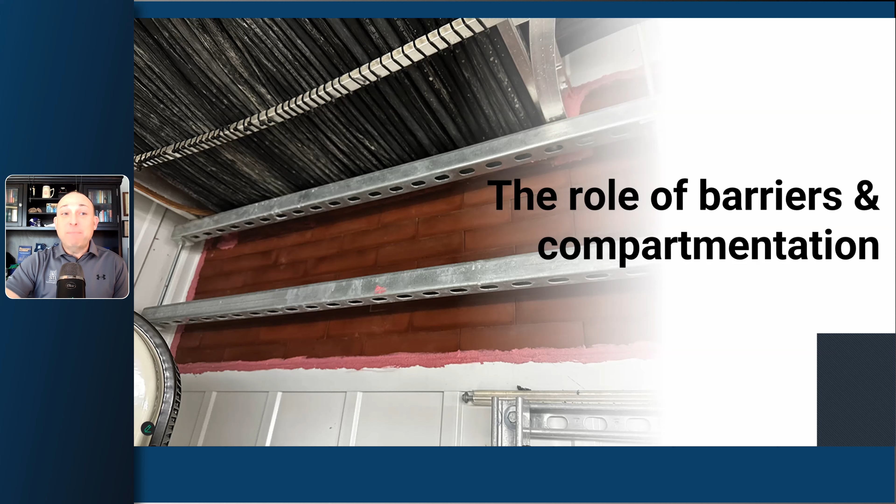So as I mentioned, we're going to start by talking about why fire stopping exists in the first place. The critical role that the barriers play in fire safety is compartmentation. This is stopping the fire and the products of combustion, and anything else that happens during a fire, to their point of origin so that people can get out in time safely. And it works in conjunction with other key fire protection principles that you see here on the screen.

It's what we call safety layering. At this point in time, we have a lot of technologies that exist to make cars safer—airbags, crumple zones, anti-lock brakes, power steering. You don't just make a car with one of these things, just like you don't just design a building with fire alarms and sprinklers. You also need some type of passive protection or containment.

So many people are familiar—you can see an alarm, you can see a sprinkler head, but a lot of people don't see fire stopping, that passive piece that's just in case the fire breaks out. This is where fire stopping lives. What we're trying to do is contain the fire and the other products of combustion to their point of origin, because at the end of the day, if you see any type of studies from NFPA, up to 75–80% of people die in a fire from smoke inhalation rather than the fire itself.

So what fire stopping is doing is what we see here on the screen. If a fire starts in an apartment there in the middle, we're using the fire rated assemblies and the smoke barriers and smoke partitions—a little bit more on that later. What we're doing is trying to limit the spread of fire to those other surrounding adjacent corridors, other apartments, whatever it is, floor to floor. So this is critical for fire stopping.

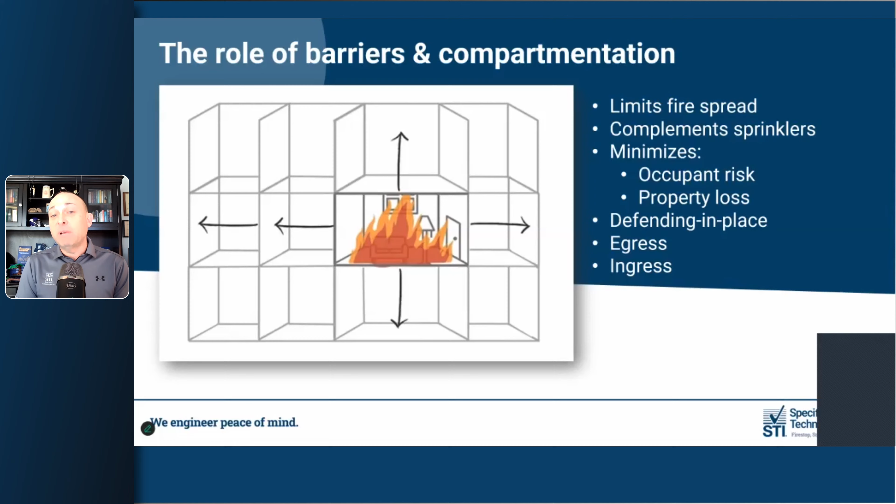It supports defending in place. So if you think about hospitals and other healthcare facilities, people can't physically get up and get out a lot of times in an emergency. So we want to make sure defend-in-place strategies are in place. And also egress, getting out if you can get out, and then ingress—we want our first responders to be as safely protected as possible. And that's what fire stopping is.

It's essentially sealing around any openings that are created by mechanical, electrical, plumbing trades—we'll throw the sprinkler contractors in there. Anybody making a hole in a barrier, we need to make sure that barrier is then protected. In terms of fire-rated joints, what we're doing is sealing together an opening that's left open intentionally for dynamic building movement, whether it be shear movement, wind sway, just different loads on floors, deflection of walls. We need to make sure those openings are protected as well.

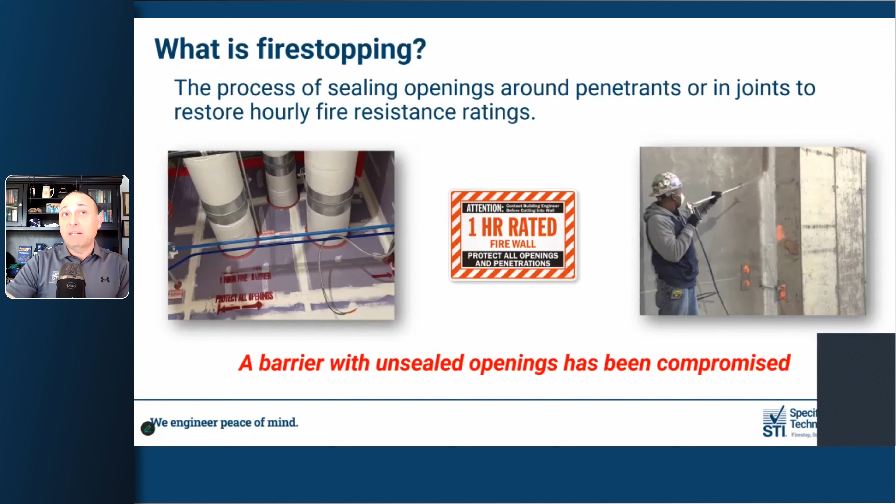So if you're a contractor, this is kind of what we teach: grab those life safety plans. If you're on the architectural side, engineering side, which most of you are, you're going to be very familiar with the building plans, the life safety drawings, and this is what we tell contractors to look for. If it's a renovation project and maybe these things don't exist and they're trying to fix a wall, we tell them to look for things within the assemblies themselves to say, hey, this is a fire-rated wall, like stenciling, which is part of the code.

So this was a 2-hour wall at some point before someone made Swiss cheese out of it. We look for things like fire doors, fire windows, dampers, old fire stopping, and any type of penetrating items. This would identify it as a rated wall.

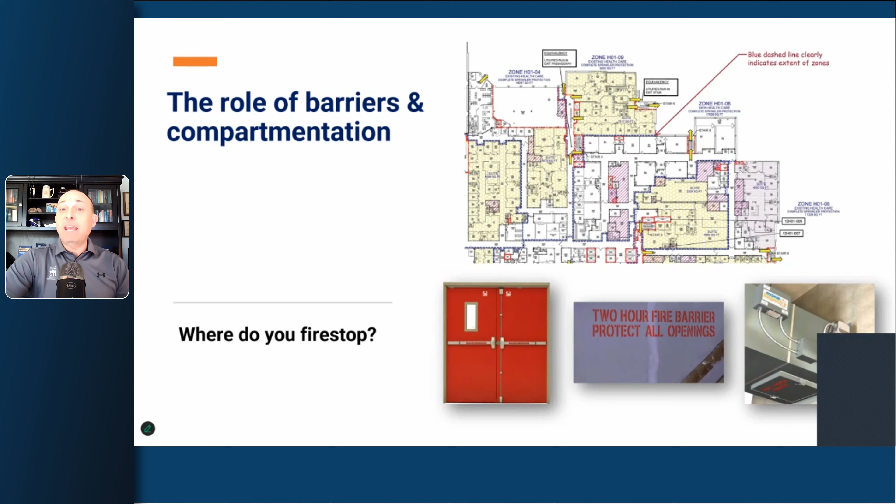But obviously, if you're on this side of it, the design side, you're going to be the ones coming up with these life safety drawings to tell the contractors what's a 1-hour wall, what's a smoke partition, what's a smoke barrier, what's a 2-hour floor. So this is kind of what we're talking about, and these are the barriers that we're using to contain the fire and those products of combustion.

So now let's talk about how they get compromised, because they do way more than people think. If you walk through any building that's been open for any amount of time, what you see is kind of what you see right here.

It could be anything: ducts, cables, pipes, you name it. Basically, anybody that's poking a hole in a wall or floor, they probably will. And even after the building opens, there's going to be small renovations. There's going to be the need for cables. We'll talk a lot more about cables in a bit.

But these are some pictures from actually new construction, believe it or not. So they're doing scab patches around ductwork there. They're using things like expandable foam, polyurethane foam that's actually very flammable.

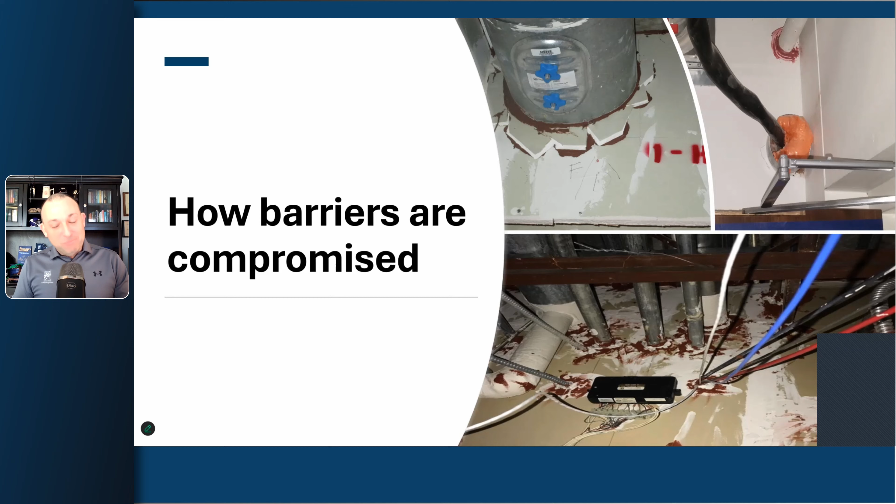Let's be crystal clear. We would never condone anything like what you see on the screen here, but we see it all the time. So we figure we'll show you what not to do. So don't let this be you.

All right, so let's talk about the MEP folks. Again, your mechanicals, your electrical, your plumbing contractors. Fire stopping is a little bit different than the trades that I just mentioned or that you see there on the screen. It's basically going to be a caulk gun that's handed to the low person on the totem pole.

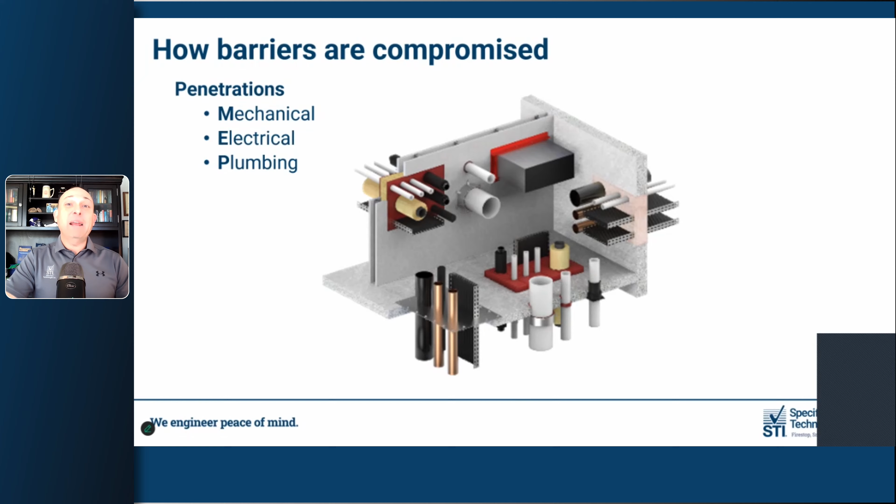So you think you went to trade school to be an electrician? No, today, son, you're going to be a fire stopper. You're going to be a caulker. So these are the same folks that are making the holes in the walls that if they're not educated properly, they don't know how to restore the hourly rating that they lost because they poked a hole in it.

So we'll talk a little bit about UL and how they define what a penetration fire stopping system is. It's very simple. If you have a wall or your floor, it's got to be rated. You have a penetrating item, so it could be a duct, it could be a pipe, cables, whatever it is. It could just be an open hole. And then you need some materials that are designed to prevent the passage of fire through that opening. It can't just be expandable polyurethane foam or newspaper or just something that is flammable.

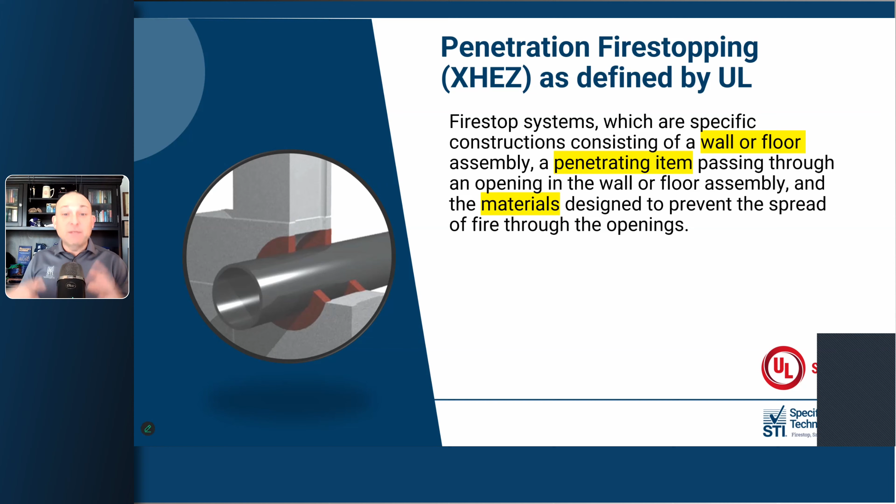You need, you see here, a concrete wall that was probably rated, tested for a certain hourly rating. Then you have an opening, a round opening, a pipe coming through there, and some intumescent or maybe some expandable type sealant that's going to close that down.

When we're talking about joints, they're kind of compromised a few different ways, right? As I mentioned, you leave these openings open intentionally so that the load of the floor doesn't crack your drywall, so that your two masonry walls don't spall. You're going to put some movement in there because you know that things are going to move over time. These buildings breathe. They have different wind sway, and in certain areas they have seismic conditions.

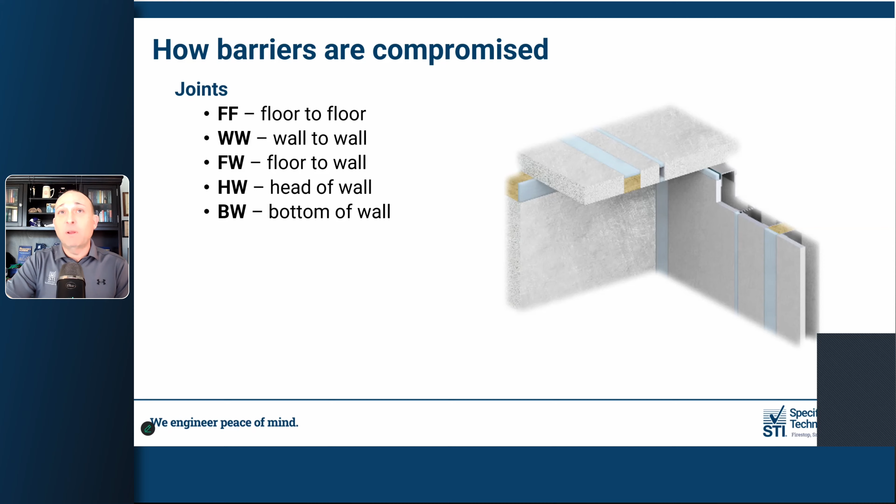So just kind of taking a look at the definition and how UL talks about what a joint is. It's going to be adjacent assemblies, right? Head of wall or 2 walls coming together. They both have to be rated. No matter how great the fire stopping product is, you're not going to get a rating to a wall that never had one to begin with. So we need to make sure we have 2 adjacent or rated assemblies, and then the material that you're going to put in that linear opening to stop the passage of fire and smoke through there.

So we see pretty typical head of wall joints there with your concrete over steel fluted decking, if you will, and a gypsum wall meeting it, and they stuff it with mineral wool and then they spray it. That's kind of what we're talking about for your interior finish joints.

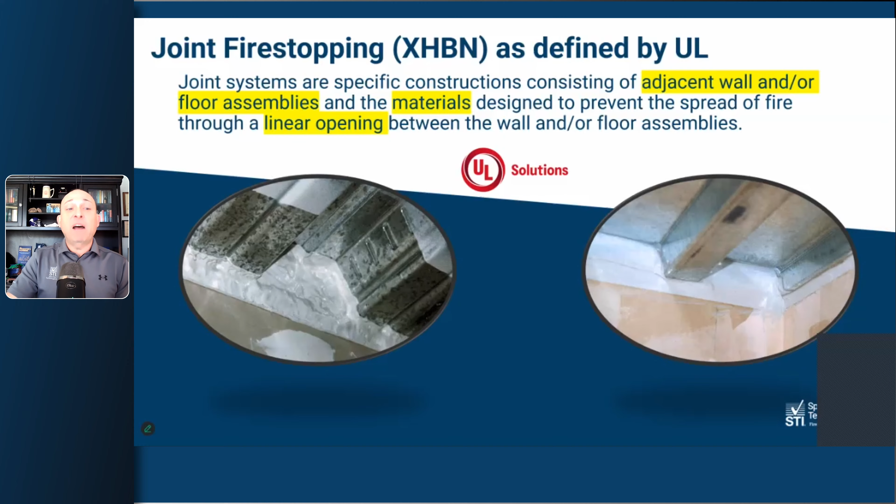And then one final area where you're going to see compromised area where you need to protect it, where you have some openings, is around your perimeter. So the code tells you that you need to extend the rating of the floor to a non-rated curtain wall panel. Most of the time it's non-rated. I realize in some cities you do have to have rated exterior walls, but for the most part you're designing these beautiful floor to ceiling glass curtain wall assemblies, and we need to make sure we put some type of system in place to protect that edge of slab gap.

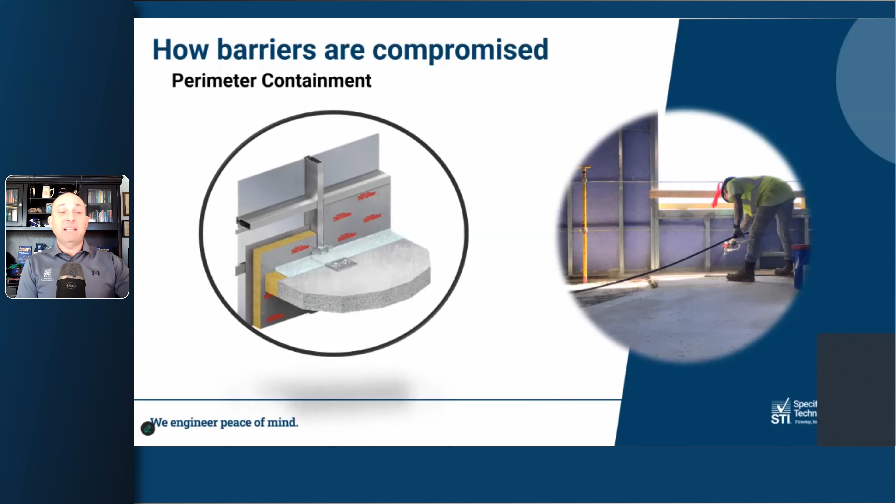So what we're doing is taking the rating of the floor and extending it to whether it's a steel back pan, or you're just insulating the panel on site, or EIFS, or a poured in place panel. We just need to make sure we're extending the rating of the floor and filling that gap so that the fire doesn't propagate on the interior of the building.

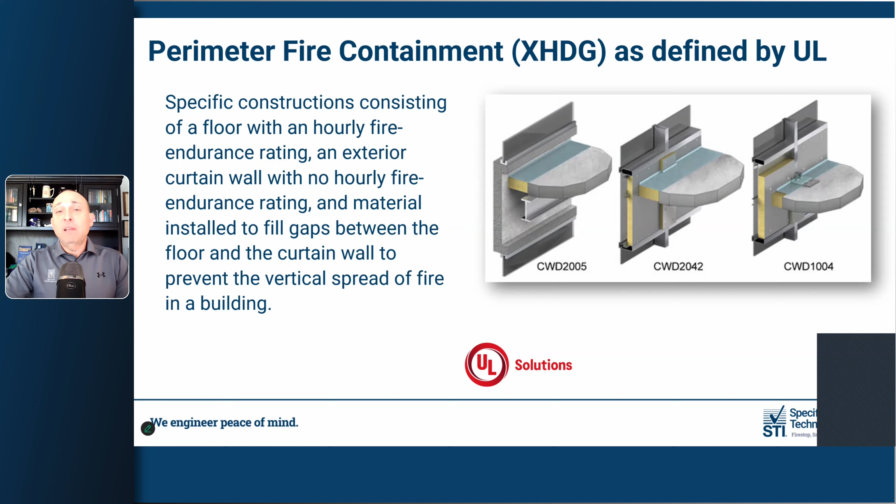So those are essentially the 3 categories of fire containment systems, if you will. And we'll talk about now what the codes say as far as why you have to fire stop them. Again, it's life safety, but I can tell you that no contractor fire stops for the fun of it. They do it because they have to.

I heard one time, and this is a sad thing, but I say it all the time, building to code is the cheapest way to build something legally. And if you let that sink in, what we're doing here is honestly we're checking boxes and trying to make the buildings as safe as possible. So at the very least, we want to make sure we're hitting the code requirements.

So when you're building to code, a lot of times you're talking about the IBC. Now we have the 2024 edition out. Most jurisdictions obviously haven't adopted the 24 edition, but every 3 years it's updated, so a lot of jurisdictions now are adopting the 2021 code. Obviously there are places, certain regional or local codes where you'll have your own code, typically based on the IBC, and then you'll have different operating codes, right.

So you'll have the life safety code, which is the 2012 edition. And the reason I'm showing this is because this is what CMS and the Joint Commission and different accrediting agencies, for your healthcare and hospitals, they're judging the different type of life safety systems to the life safety code. So you have a building code, you have an operational code.

So a lot of times what we say to architects is, hey, design with this in mind. For right now, what they're going to be inspecting to is going to be the NFPA 101, even though your 2021 building code says this. So they're always going to default to the one that's most restrictive. Don't find out afterward which one that is.

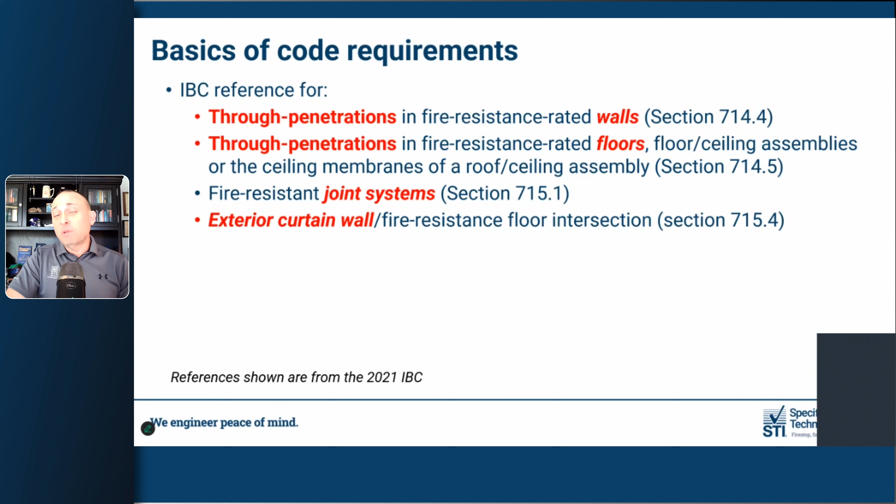I did mention a little bit earlier, we talked about smoke barriers and smoke partitions, using those to help contain the fire. A lot of times people will just say, hey, what do we do with the smoke walls? And smoke walls, as you see, the code doesn't define what a smoke wall is. So you're going to be dealing with smoke barriers and smoke partitions. This is essential for contractors to understand that your smoke barriers actually need to carry a 1 hour fire rating. So when you're specifying or designing your building with smoke barriers in mind, just know you're essentially designing a barrier that contains a 1 hour fire rating, and it also stops the passage of smoke.

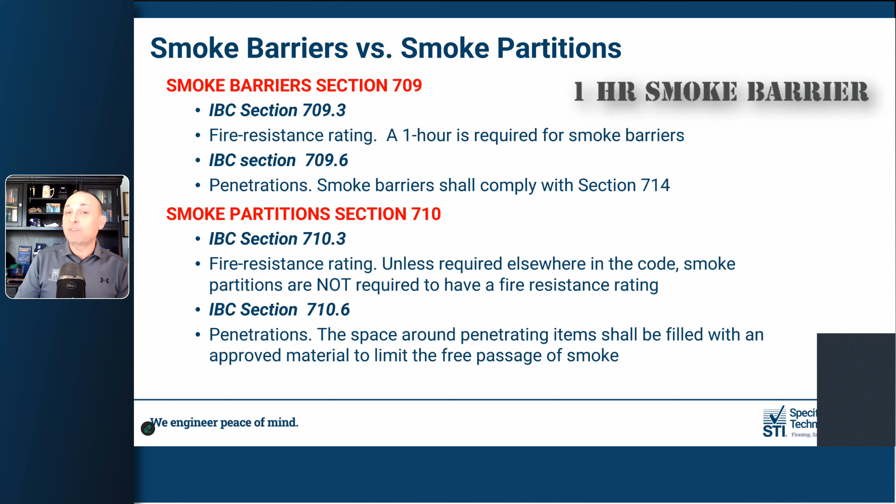So it needs to have an L rating, whereas your smoke partitions, non-rated, does not have to, but it does need to pass the local authority having jurisdiction, so you can't just put bubble gum in there. You need maybe an approved smoke and acoustical sealant. So there's the differentiation between your smoke barriers and your smoke partitions. Don't call them smoke walls, because they don't exist.

Since we're talking about codes, we're going to talk about where we do testing. We are a Firestop manufacturer, so there are others out there as well, and the code doesn't say where we have to do the testing, just that we have to test it to certain test standards, ASTM and UL standards that we'll show you next. These are three of the biggest testing agencies in North America.

A lot of times people just default and call them UL systems. I would say maybe 95% of through penetration testing does happen there, but there are a lot of curtain wall or perimeter fire containment systems that are tested at Intertek. FM Approvals, part of FM Global, has their own testing lab as well, so there's a whole nother batch of tests over there.

Again, the codes don't say where the testing has to be done, just that it has to be done to these standards that you see on the screen here. So you don't have to memorize them, but I would recommend putting especially these test standards into your spec. This way the contractors know that there are different products for through penetrations and we test them differently.

ASTM, if you think about it, will give you your F and your T rating—a little bit more on that later. UL will then take that F and T and build on it, letting us test for smoke leakage and water washout. Your joint systems are tested to different standards, because there's going to be movement like we talked about, and quite frankly there's not an opening with a penetrating item, it's a joint system. So we have different test standards for the different types of fire stopping systems that you will encounter and that you have to design to.

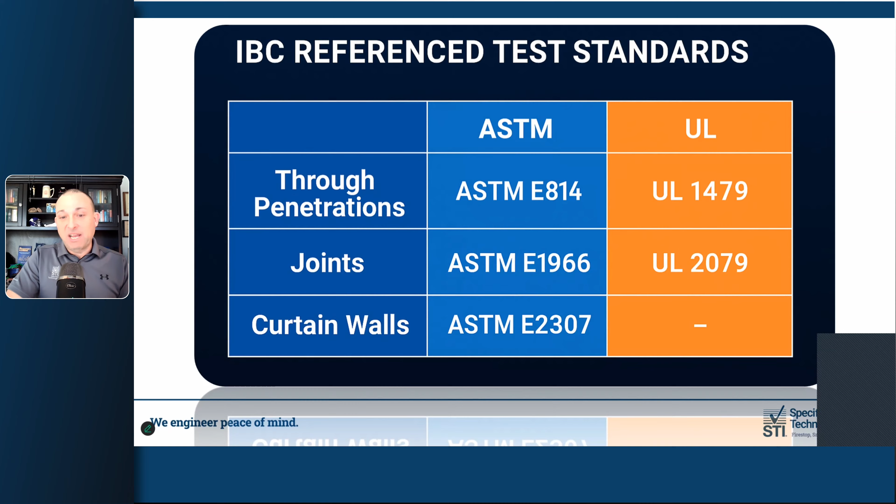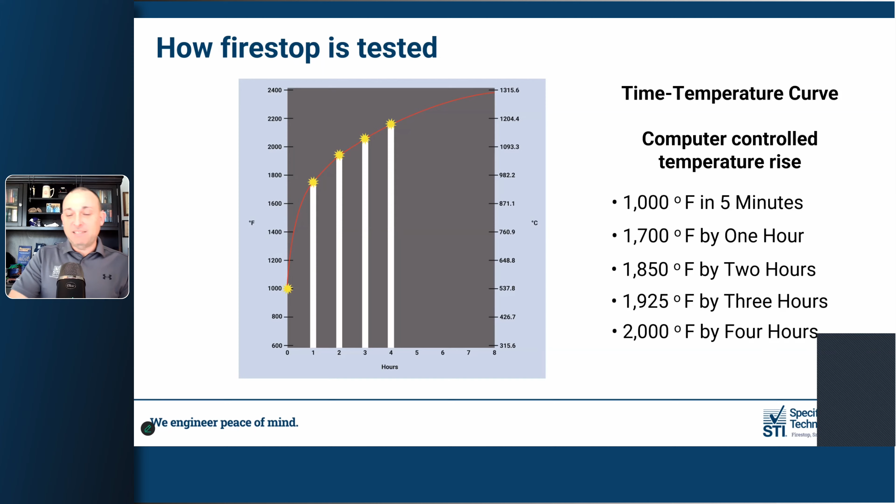When we do that, the first thing we're going for is an F rating. This is what most people identify fire stopping with—your flame pass through, from that hot side underneath to the cold or unexposed side above, well, how long did it last? Most of the fire ratings you'll see are 1, 2, 3, or 4 hours. There are some 30-minute ratings that have been specified or called out there, but as manufacturers we're typically trying to go for at least an hour, if not longer. So F rating will be the first thing that you see on there.

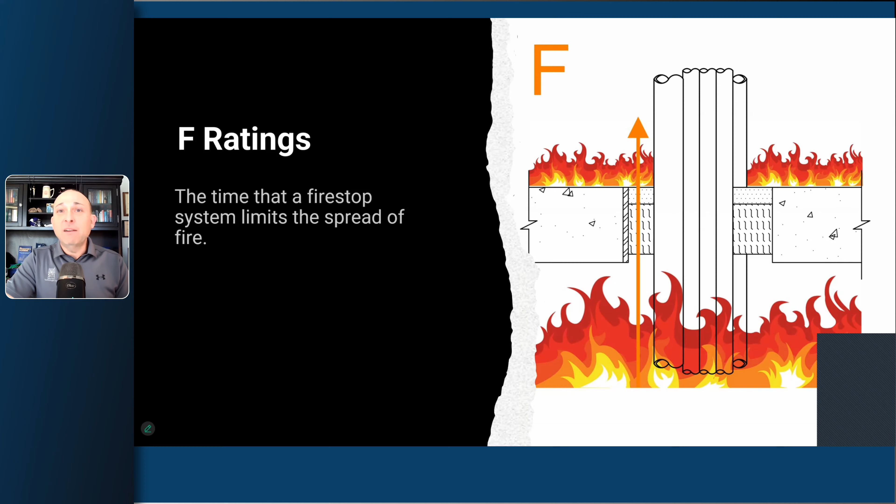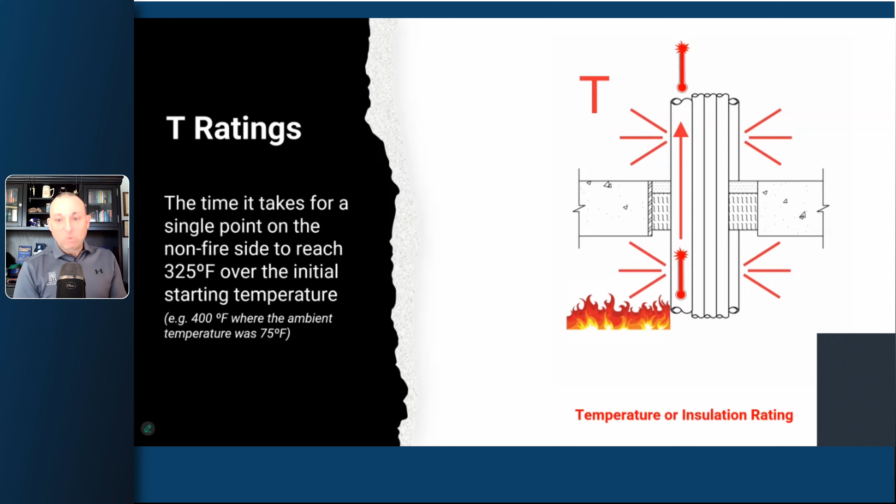The next thing that you'll see on a system card is going to be a T rating. This is another rating required by the code, and it protects the thermal rise of that seal or that space around the seal as the fire hits it, on your unexposed side. So even if that fire stop system is in place, if you have a cable bundle or a bunch of copper pipes next to each other that are going to get really hot really fast, you're going to have 325 degrees above your starting temperature really quick. So your F needs to match your T, unless it meets certain exceptions. So what are those exceptions? That's a great question. So here they are.

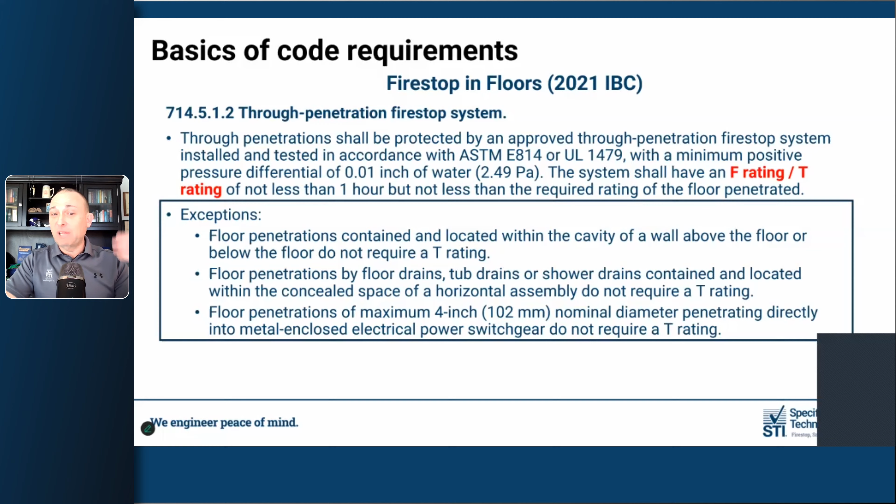So the code says that you have to protect the thermal rise through that fire stopping system to the unexposed side, unless it meets one of these exceptions. So a lot of words on this slide. I don't like words on slides, so I'll show you pictures instead. Words scare me, but this is essentially what that code section says.

If your penetrating items wind up within the stud cavity of a wall, which they usually do, then you don't have to subject them to a T rating, which would entail wrapping them 36 inches with some high temperature wrap. So as long as they're in the stud cavity of the wall, you're good.

Floor drains that are going into floor ceiling assemblies, think about wood framing structures. So if that goes into there, you don't need to have a T rating.

And then if you have up to 4-inch conduit going straight into a metallic switchgear, you don't have to protect the thermal rise there as well. That's going to all find its way into that box there.

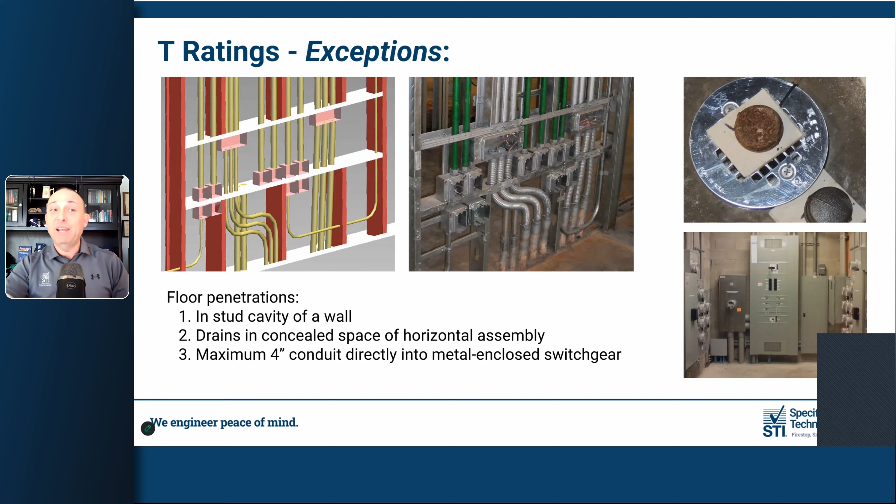Again, these are exceptions to the code. So if you wanted to make sure that you were meeting those exceptions, have a pre-construction meeting with the architect yourself, with the general contractor, with the installing contractor, just to make sure everyone's on the same page and they understand that this is an exception, right? So it's not the rule, because the rule is the code, which says you have to protect it.

Some optional ratings that we get as manufacturers, as I mentioned, we're going to check the smoke leakage in certain scenarios. So if we have nested cabling, cable bundles, or again, head of wall joints, depending on for your smoke partitions or your smoke barriers, where you need that L rating also. We're testing at UL or according to a UL standard to get this L rating.

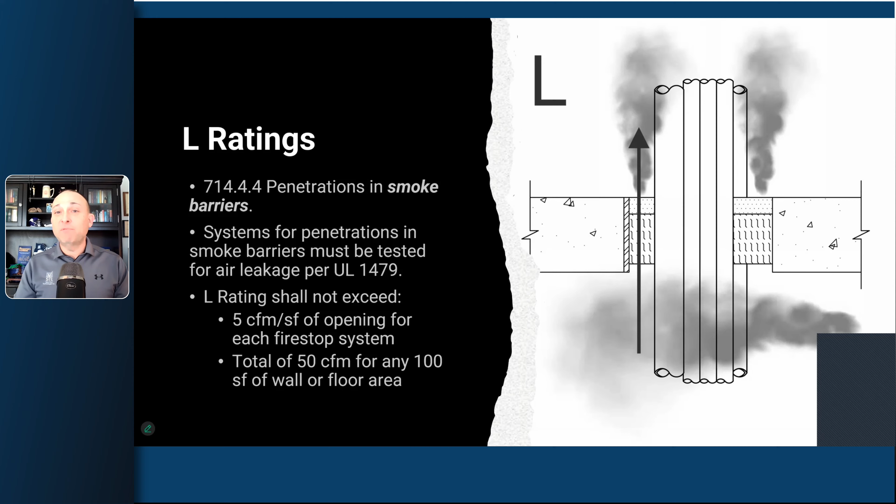So the code recognizes that we are not going to always have a hermetic seal. So you could see 5 CFMs per opening or up to 50 CFMs per wall of 100 square foot is allowed. Again, we're not always going to get a hermetic seal, but it is some allowable air leakage through that seal.

And then W ratings, sometimes it's important where you have plumbing stacks where you may have some condensation issues or pipe bursts. Once you're in full operation, you may want a W rating or a watertight seal on there. This is also good for floor seals as the building itself is going up.

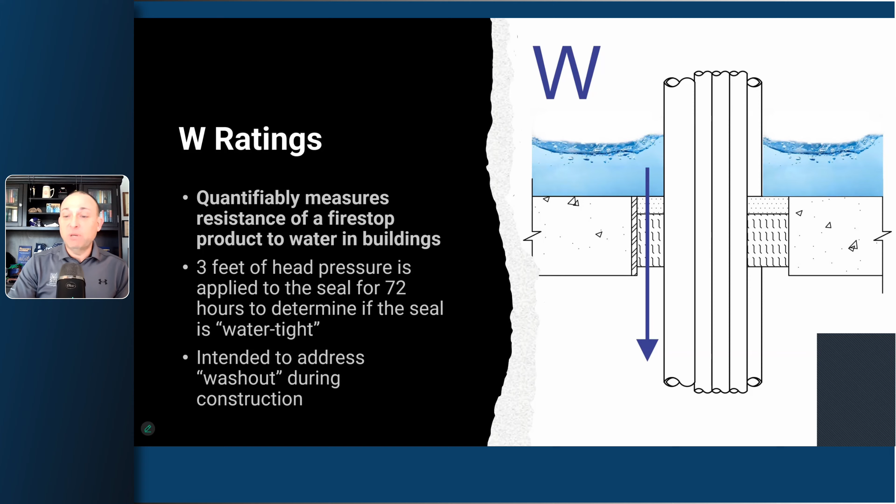If they're using a silicone type product, you can get a W rating where we put a cylinder on top of that seal and put 3 feet of head pressure on there for 72 hours before we burn it then. So this is going to basically expose that sealant, that fire stopping system to water for a certain amount of time, simulating it sitting on it, and then the building catching fire at some point in the future. So those are some optional ratings that you can put into your specification for certain instances.

This means not just your local authority having jurisdiction, not just the local code official. They have a lot of other things to look at. So if your building is over 75 feet high, or it's a structure that's of national importance, air traffic control towers or hospitals or key facilities where if you had an emergency, you could have some real devastation.

So certain types of buildings, including now wood frame structures or group R occupancies over 250, need to have a person that's dedicated, or a company that's dedicated, to reviewing fire stopping systems all day long, that's hired by the owner to do that, and then provide a report to the local code official, who then obviously can go and inspect or spot inspect things like that.

Special inspection for fire stopping - this is something that more and more jurisdictions are starting to enforce. But if you put it in your spec, they'll know that it's actually a code requirement and it won't be overlooked as much as it is right now. That's me on my soapbox.

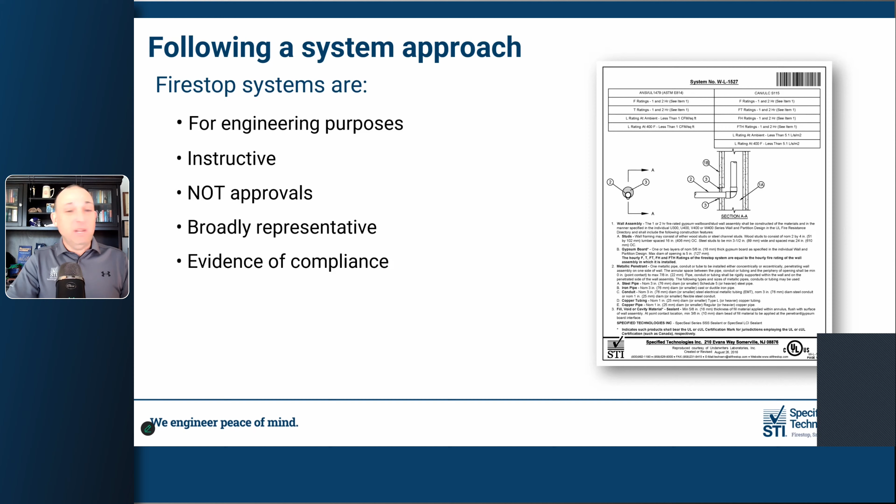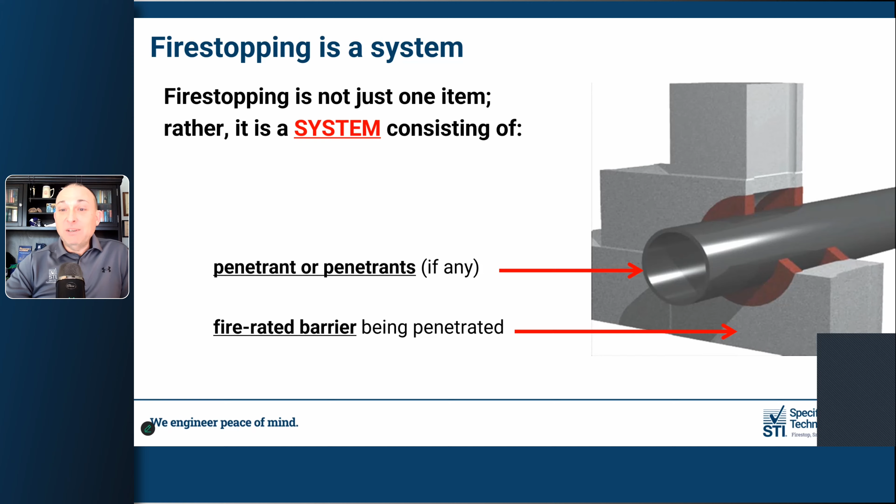WL 1527, as part of their submittal package, shows that this pipe can go in the wall on one side and then you're sealing it only. Evidence of compliance is that it's been tested to those standards we showed you before. So this is what a system looks like, a simple one pager where you can get away with caulk only, because maybe you have a metal pipe coming through a block wall. The block wall is not going anywhere for 1, 2, 3, 4 hours, but we need to make sure that if that pipe comes through there, we seal this opening with sealant designed to protect that penetrant.

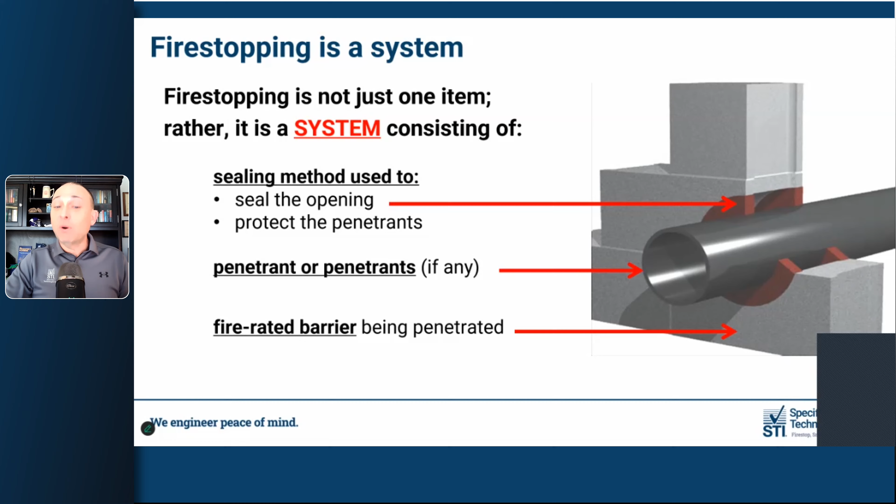And if it's plastic, then you need something that is intumescent, that's going to expand with heat because that pipe is going to burn away. So you need to make sure it gets very aggressive.

When you're talking about systems, up top it's always going to call out what the system number is, all of your ratings. This one has F ratings, this one also has some T ratings. Your penetrating items will be right here in the middle. Most of the time, if it's a metallic pipe, you'll have steel pipe, iron pipe, copper - so it could be the same system for 5 or 6 different trades, like plumbers and sprinklers and electricians using conduit. This could be the same exact system for all of them.

Your annular space is going to be the opening, so it can't just be whatever size they want - it's going to tell you it needs to be a certain size. And then finally, the fire stopping material down there.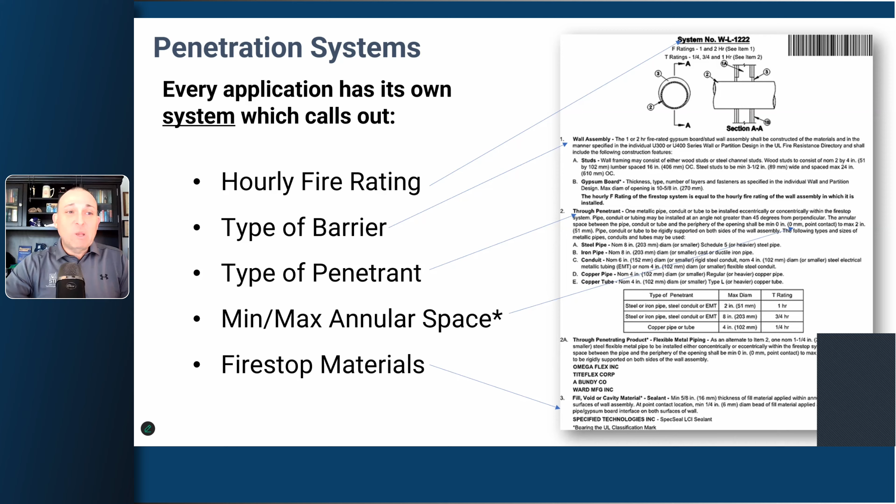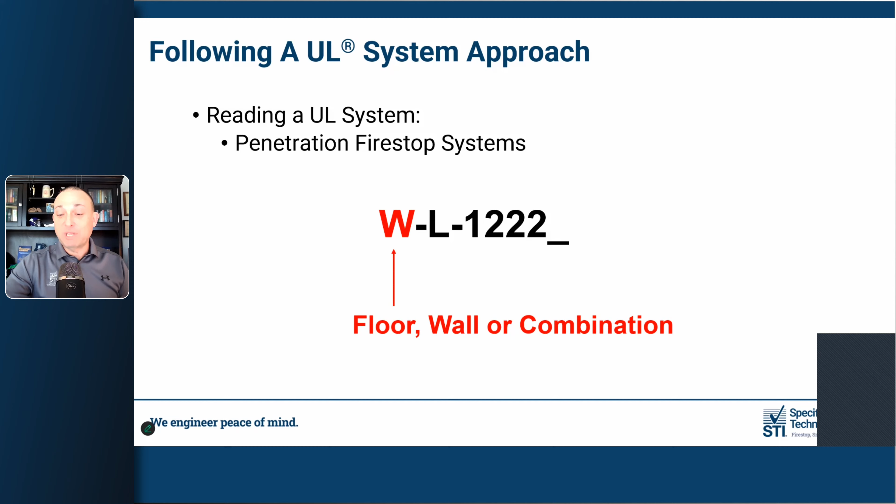So if you're reviewing a submittal package and seeing some UL systems, you can easily identify that W tells you this is a wall system. They're not trying to trip anybody up, the nomenclature is pretty easy. So it's going to be a floor, a wall, or a combination - wall, floor, or floor and wall together.

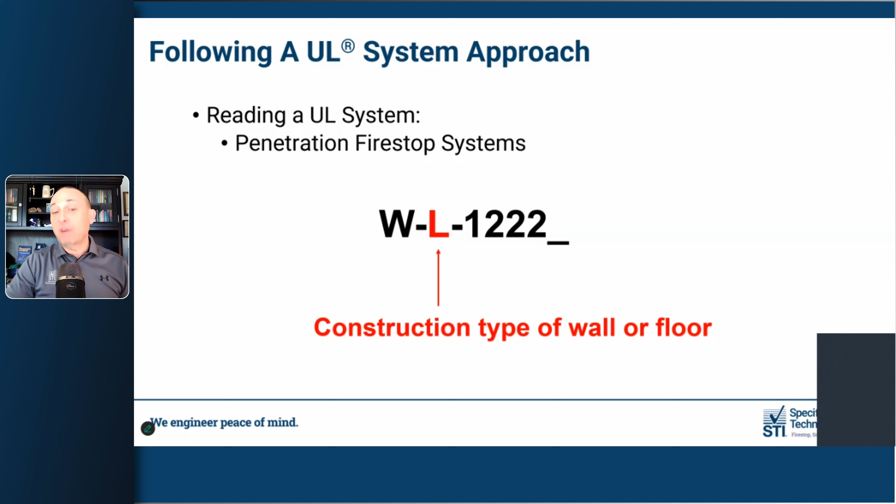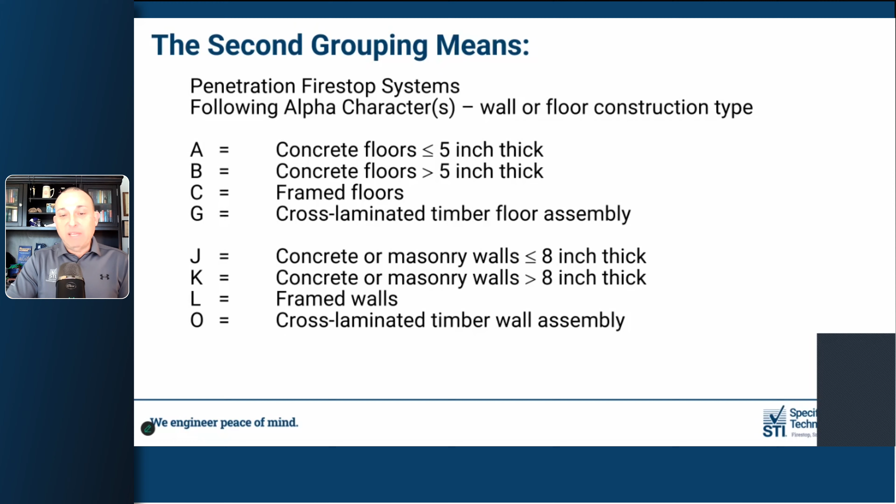The second letter will tell you what type of wall that is. In this case, your L is going to be a framed wall, so it could be framed with either wood or steel studs. Whatever manufacturer, whatever they're using is going to stay in the system, whether we used steel or wood studs. Sometimes it's both, sometimes it's either or, sometimes it's only one, depending on the product. So you could have a concrete or masonry wall. Those combination systems, as I mentioned, you'll typically see CAJ, but that's what that second letter or grouping of letters tells you.

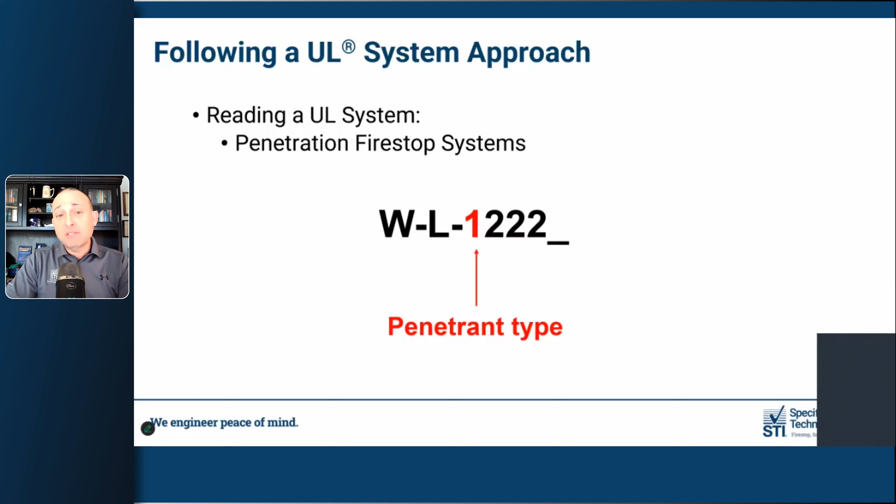The first number you come to in a UL system will tell you what the penetrating item is. Your 1000 series are going to be all your metals - iron, steel, conduit, copper. 2000s plastic, 3000s cables, and so on. So when we're teaching contractors how to install this, the first thing you need to do is ask, what's a system? A lot of times they don't know what a system is, but they all mean something - all the numbers, all the letters mean something, and even the last few numbers mean something.

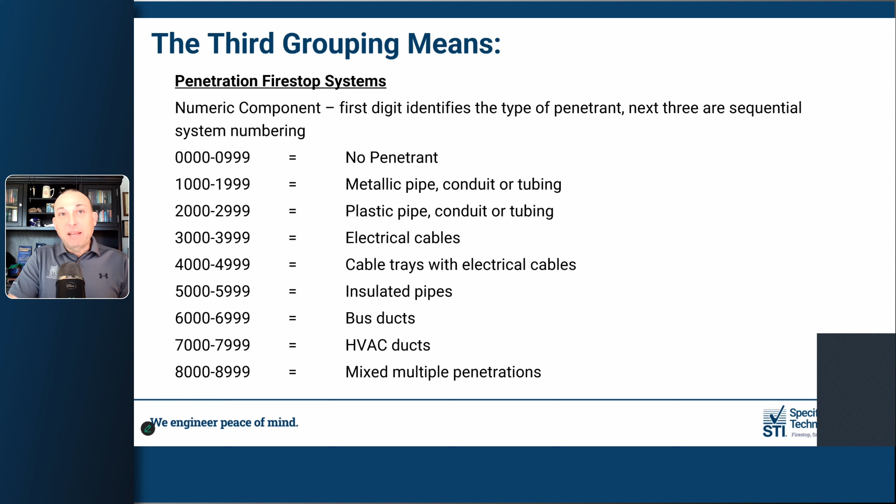It means who authored or who sponsored that test.

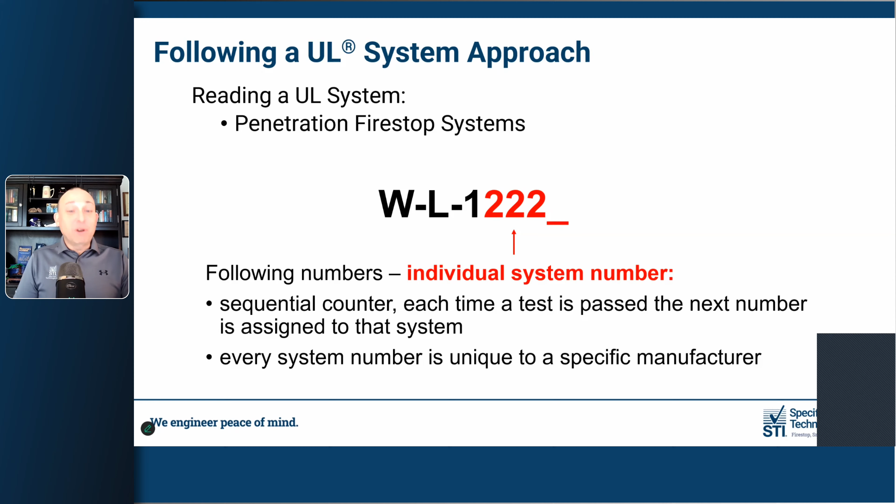WL1222 is the 222nd listing in penetration fire stop systems through framed gypsum walls, and STI is the owner of that system. And then you'll even see the little dash there at the bottom.

A few years ago, UL actually started running out of system numbers, and they didn't want to take away the nomenclature up to that point. So what they're going to do is just add a digit at the end of it. So if you see 5 digits at the end, like WL10000, it's not a typo. It's just probably one of the newest systems.

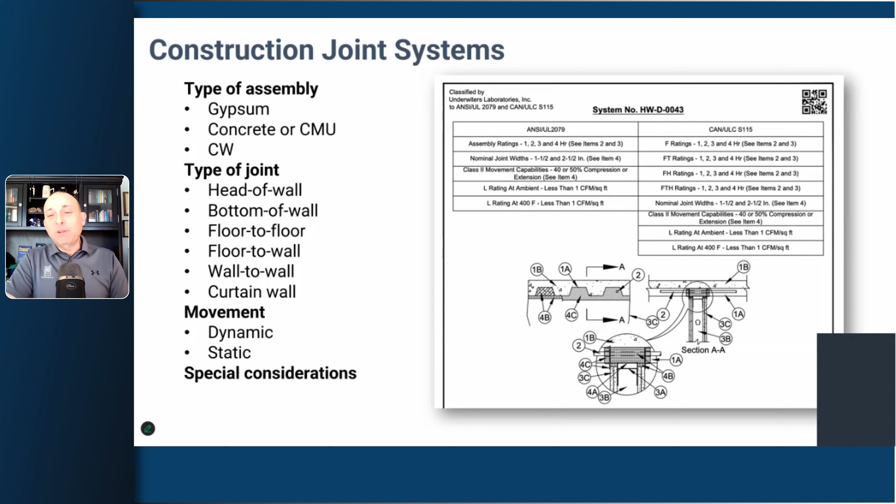On the right-hand side, for our Canadian folks, you can see that we have different standards that we're testing for Canadians as well. So you'll see that they break that out a little bit different with the F and the FT. And if you know, you know, and if you don't, feel free to reach out and we'll put you in touch with our Canadian crew to help you decipher some of these. But there are some different standards north of the border there.

All right, so when we're talking about how to read the numbering system here, your first 2 letters will tell you what type of joint system that you're dealing with. So you can see the perimeter fire containment or your curtain wall. That's lumped into how to read the same system, even though it's a different test standard. So you'll see head of wall, HW, bottom of wall, BW. Again, not trying to trip anybody up. They want to make sure that we're getting this right.

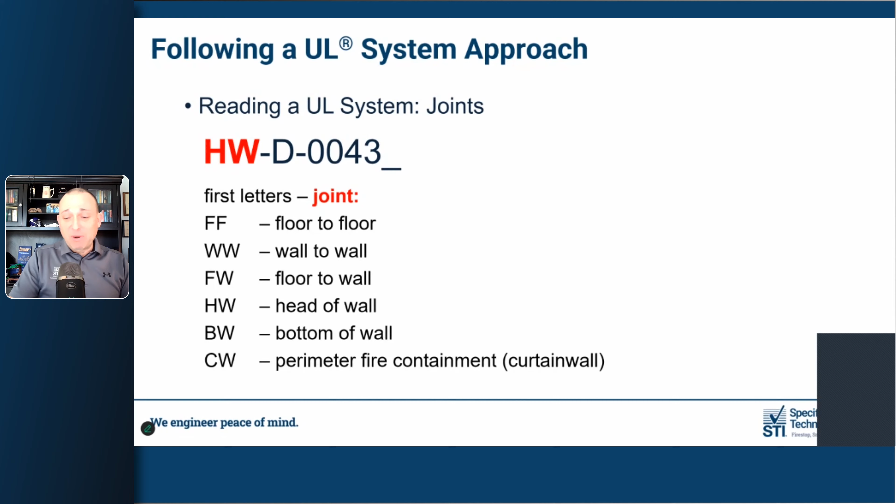The second letter or the second group there will tell you if that joint system moves or not. So if you see the D, that means it's a dynamic system. It was tested with that movement, and we, as the test sponsor, will put in what dynamic movement was achieved there. So sometimes it's a class 1, sometimes it's class 2, and this all depends on how much we're moving, how fast we're moving it. So be cognizant of that.

And then there are some static systems as well, whether you're not getting compression and extension because maybe the joint is in the plane of the wall, or maybe a contractor used a product that doesn't move, that was not designed for it. We do test some things sometimes that we know are not going to move because sometimes they don't have to, and sometimes we know that things happen anyway. So at the very least, we want to make sure that we can get you the F rating that you need for that fire protection.

And then the numbers here mean a little bit different in your joint systems. The first number will tell you the width, or how wide it can be. So you can see the 0 series can go up to 2 inches, but the systems will oftentimes be very specific, always be very specific, about what was tested. So if it was a 1-inch joint, it would still fall into the 0 series, but you couldn't exceed 1 inch with that particular system. And then as the joint gets bigger, you can see that that first number there will get bigger.

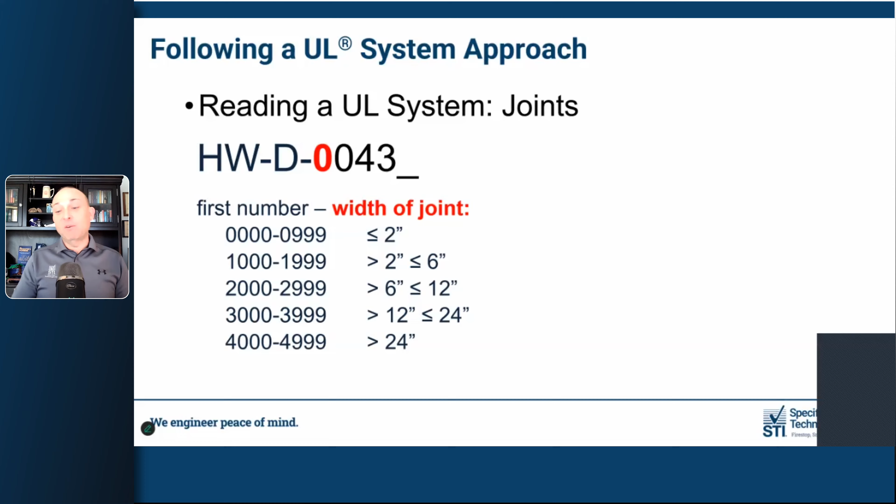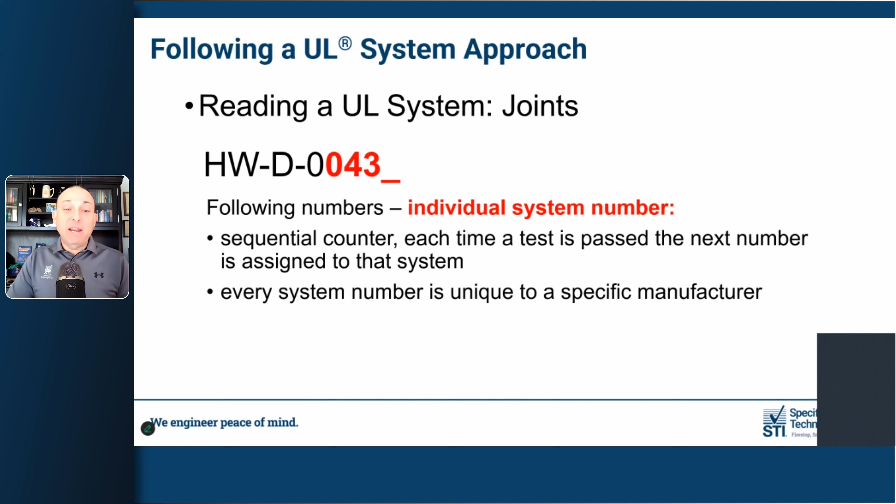And then the same way that the penetration systems work, the last 3 and/or 4 numbers go to the individual test manufacturer there. Same deal with your joint systems.

All right, so let's talk a little bit about some fire stopping products.

Again, we know that this is just one portion of the system. The products themselves, oftentimes contractors will think, give me the 2-hour fire caulk or the 4-hour fire caulk. Sometimes they go to the local hardware store and buy the 2-hour because it says 2-hour on there. But the products themselves do not have a rating. They're just one portion of the fire stopping system.

But when you are specifying this, it's good to know how they break out and what the applications are. So you don't just say put in a tested fire stopping system. You may want to say, put in an intumescent fire stopping system that's designed for movement. You can get a little more specific and lean on your fire stopping manufacturers to help pull together some of that language, if you're not using one of those services that stay up to date on all the codes, standards, and test methods.

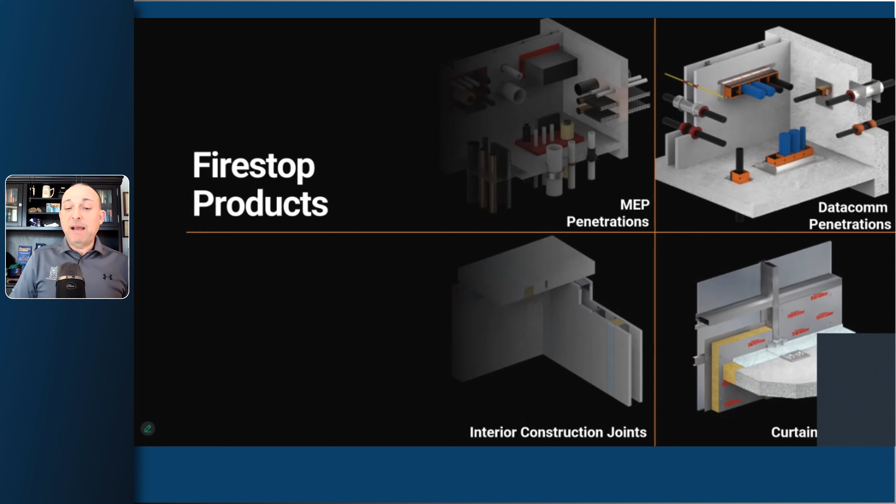So again, here are the different product categories. We're going to talk a little about MEP penetration products. We'll break out data communication penetrations because they're just different animals. The cables are in sleeves, so they're outside of MEP penetrations. Unless you have some major renovation, you're not moving ductwork or pipe, but cables move all the time. Our joint systems, as we talked about, both interior construction joints and curtain wall joints, we'll talk a little about what types of products are out there and what they do, and some of the benefits of each.

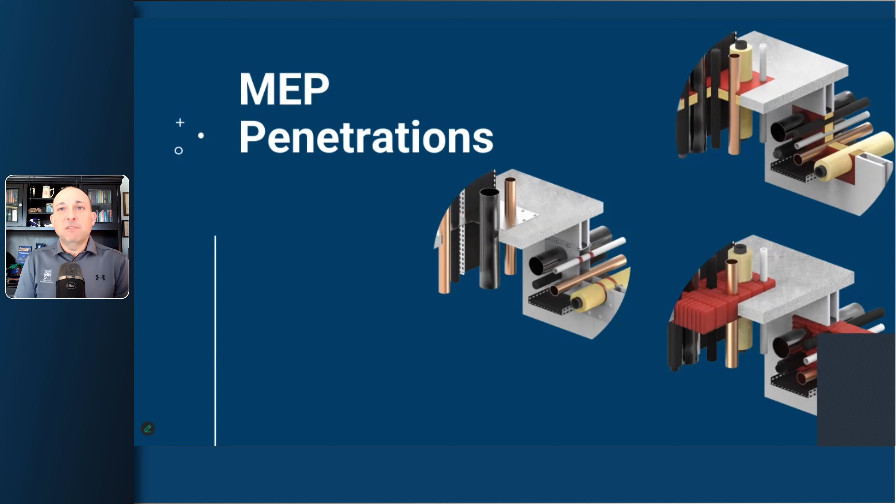So we'll start with MEP penetrations. Everyone knows the intumescent sealant. Some people like to do finger painting all over the wall, but what we're trying to do is get that sealant in the annulus, flush with the surface. You can see a typical plumbing contractor here getting the sealant in there and using a tool to get that flush with the surface.

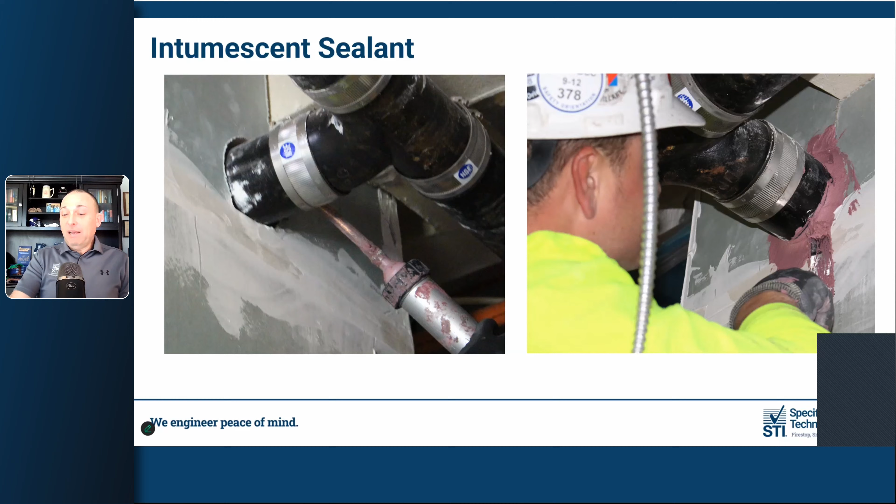Intumescent sealant is a flexible, fire-resistant material. It reacts by expanding with heat, or intumescing, and forms a thick char. It's great for metal pipes - easy, since metal pipes aren't going anywhere - and it's also good for certain smaller size plastic pipes. But when you get a little bigger with plastic pipes, the sealant alone isn't able to crush that PVC pipe.

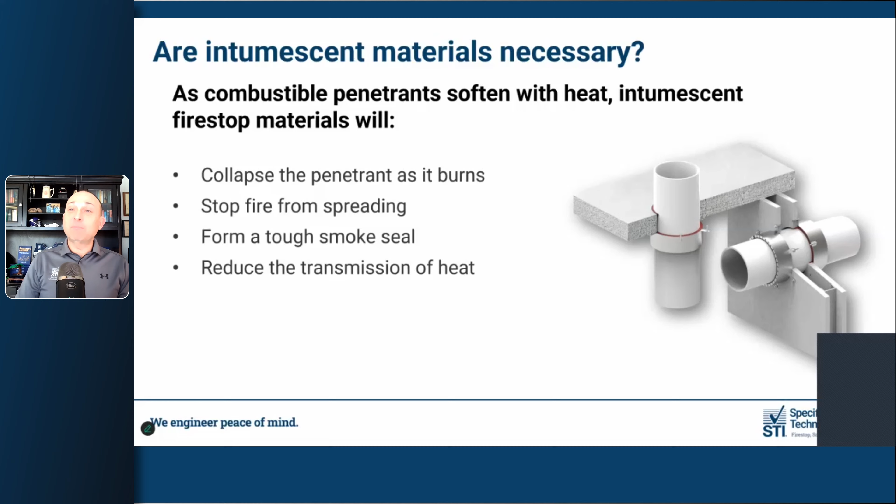In certain jurisdictions, PVC is perfectly acceptable - it's easy to use, easy to put together, lighter weight - but from a fire stopping standpoint, it's going to burn away. A PVC pipe is going to be gone in 7 to 10 minutes. So if you have a 4-inch PVC pipe, you're going to have a 4-inch hole in about 7 to 10 minutes, unless you put in a fire stopping system that doesn't just have sealant around it, but has a collar specifically designed to crush that pipe.

You can see what it does here on the left, the hot side, the hard ash char on the right side. What it does is crush that pipe - it seals, it intumesces really fast, really rapidly. This is why you have to have certain fasteners on the wall, to make sure it doesn't blow off. But on the cold side, that PVC pipe continued. So from a T rating standpoint, this is also a great building product to work with. You just need to make sure you have the right type of fire stopping systems when you have pipes that will burn away in 7 to 10 minutes.

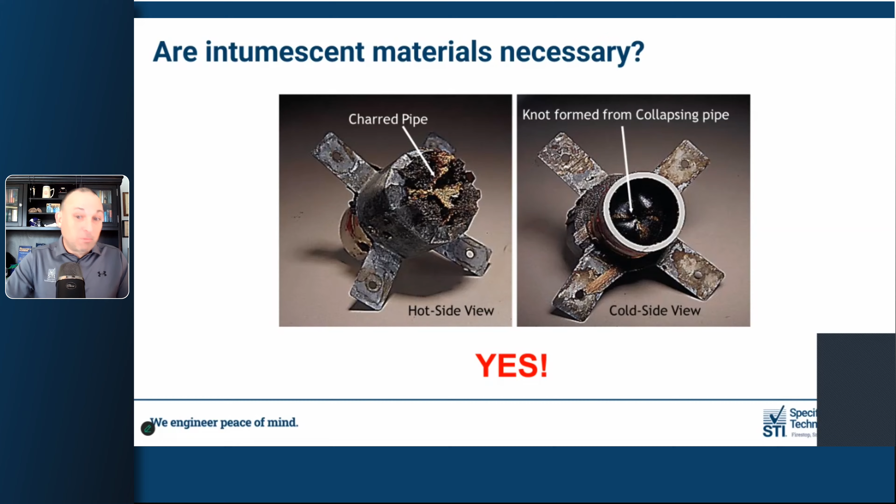So for data communication, we'll talk a little about the types of products here. These are penetrations where you're going to have frequent moves, adds, or changes - think upgrades in Wi-Fi, or a new office that needs Wi-Fi, or expanding network coverage, with cables being added, moved, and rerouted. The frequency of change can vary significantly depending on the building's occupants. You can have new occupants and suddenly have to redo everything - it's always evolving, always upgrading cables - so you need fire stopping systems or products that allow for these high traffic openings to meet the flexibility they need.

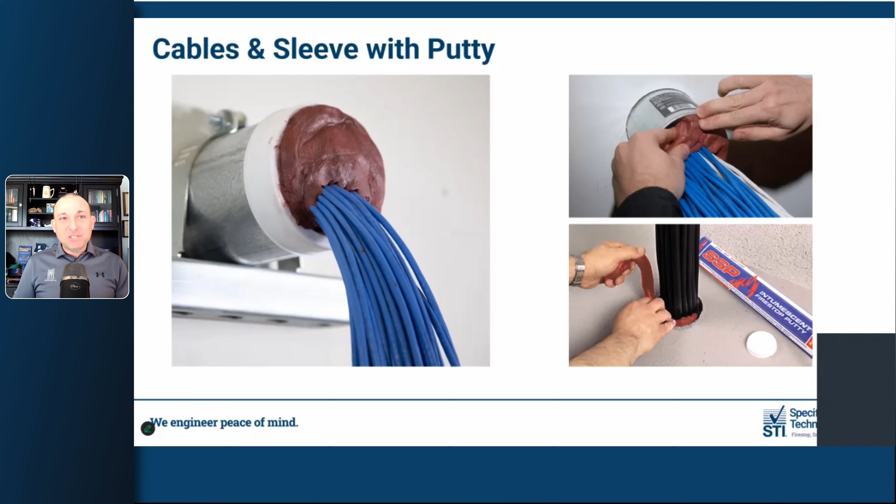So historically, putties have been the go-to solution for data cables. Perfectly acceptable - they're soft, they're conformable, they don't harden, well, most manufacturers don't harden over time. They're manually packed into the openings, so they're specifically useful for small to medium cable bundles where you're going to need to get back through there at some point in time. But once you start getting a little bit more, too much, then you're going to turn that sleeve into something that's overfilled.

When you have data cables, you have something that's flammable - you have plastic jacketing around there. So these sleeves are going to have some type of cross-sectional fill maximum of around 48%. I don't know if you've ever been on a job site and seen a sleeve with more than 48% fill, but I can tell you it happens all the time. If you have a 4-inch sleeve, for instance, you really can't have more than a 2-inch bundle of cable going through there.

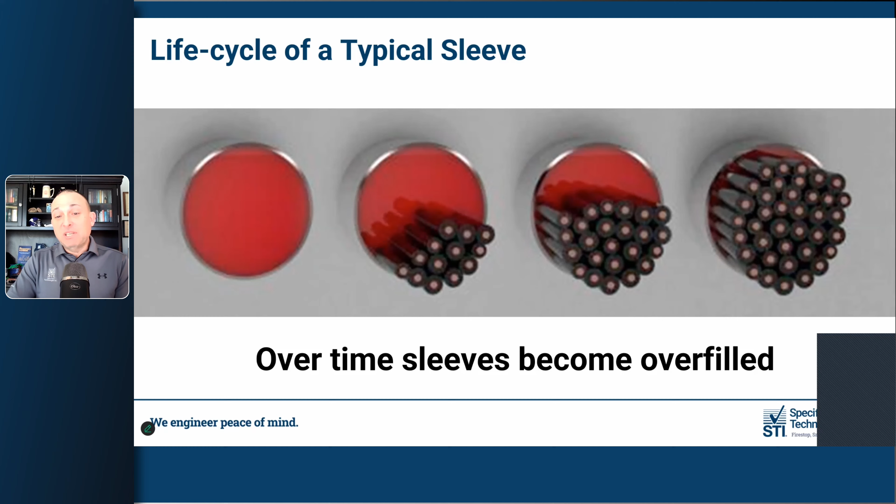Because, again, over time, it's tempting to just run something else through there, or if you are upgrading, next thing you know you have something that looks like the far right, where you have no intumescent material and nothing but cables. So what happens is you're stuck using a retrofit device, and that's why they were invented. In the past, historically, you didn't have an answer outside of taking half of those cables that were already connected to something in the building, already in operation, making a new opening and fire stopping them both properly under 50% fill.

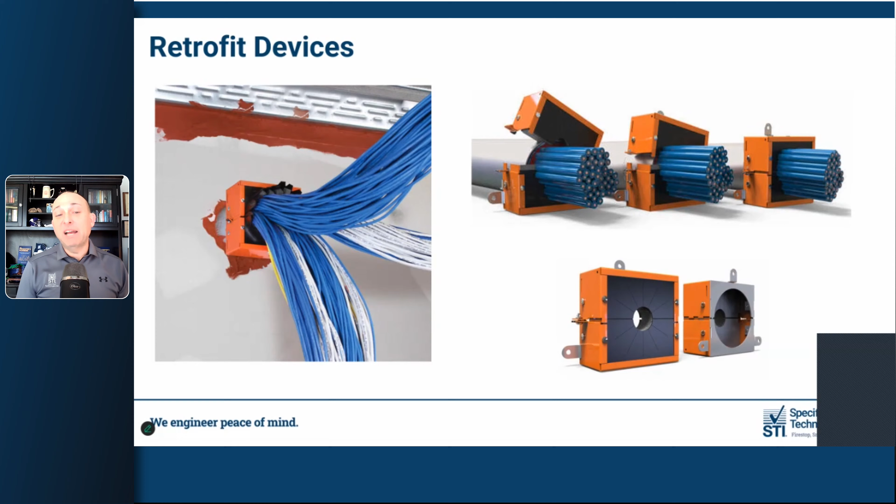But now there are retrofit devices on the market. So this is ours - you simply snap it over the end of the overfilled sleeve, or it flush mounts to the wall, and you can bring that overfilled, non-compliant, life safety issue back to compliance in about 15 seconds. But why do that to yourself in the first place? Avoid any kind of hassle with overfilled sleeves by using fire-rated devices from the start.

This is our device here, and it's pretty cool. With a little cutaway, you can see how it opens, it closes. It allows for maximum cable fill of 100% visual fill. All of the intumescent material is inside of that box, so it's a sustainable solution. You don't have to maintain it, so it's zero maintenance. You don't have to do anything to it - you can just route cables.

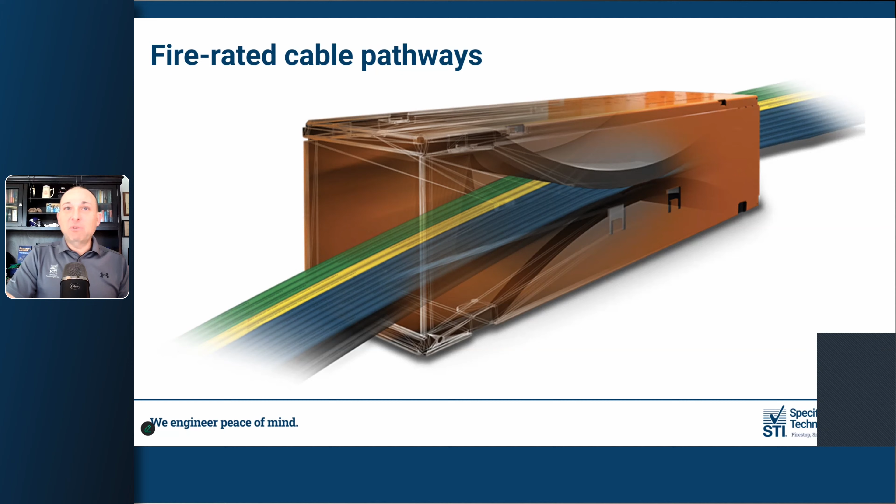Contractors even use pull strings in there so that they don't have to go popping ceiling tiles. If you're doing work in healthcare facilities, you know how that could be a big issue. So fire-rated cable pathways are something a little bit easier for when you know you're going to have a lot of cables in there - maybe you're doing work in a data center.

Or you want some of the flexibility, so you can see here, you can just load them up. You can have them for different types of services. You can leave the pull line that you see on the right hand side in there so that you don't have to keep going up above the ceiling tiles. You can coordinate them in the floor. So if you're going to have a lot of lines coming through there, or maybe future moves, adds, or changes, you can have it ready for that type of upgrade later down the road. But again, 100% compliant, 100% of the time.

Check out UL's evaluation service report. That's not us saying it.

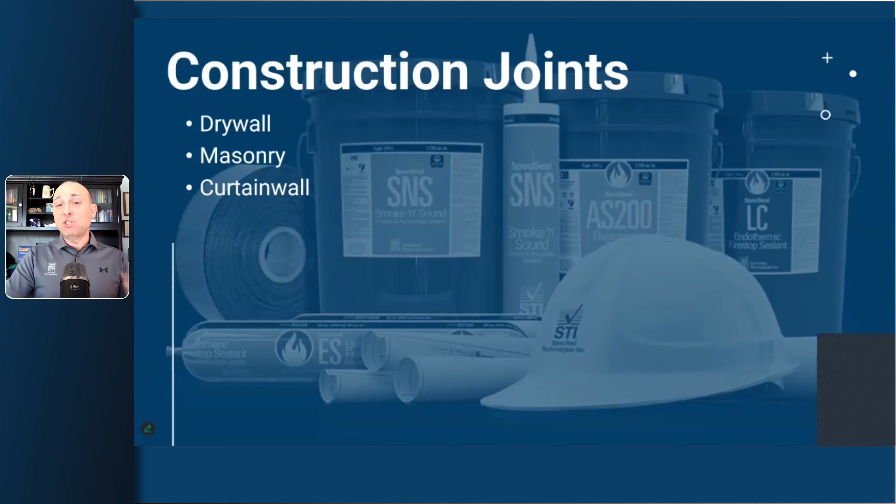All right, so construction joints - we're going to talk a little bit about some of the contractors that leave these joints open intentionally because of your designs, right? Drywall, masonry, curtain wall type contractors. Again, you're designing these joint systems typically to allow for some type of building movement. So you can see your head of wall there, concrete over steel fluted decking, meeting that gypsum wall. So they're packing the flute, putting a little strip of mineral wool in there, and then a contractor is coming along with some type of elastomeric.

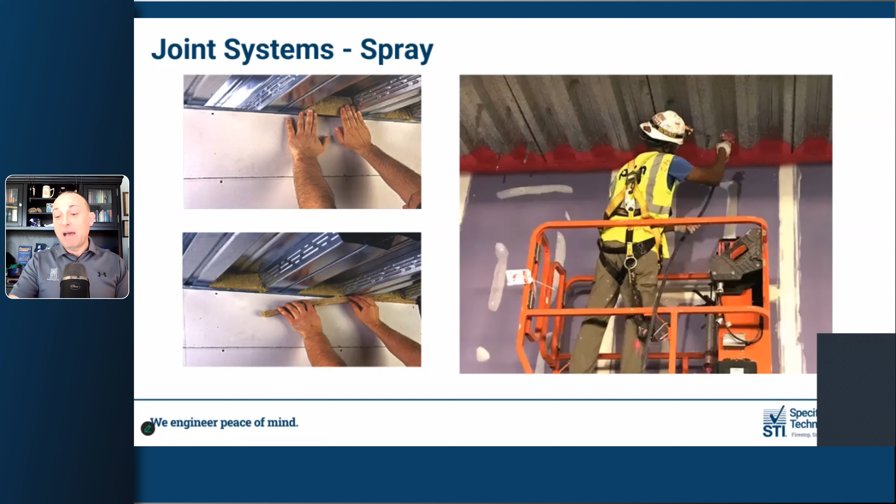So this is a different product than your intumescent, which will expand with heat. Elastomeric often will move with that joint. So sprays are going to move a lot more than your typical caulking systems. Contractors do like the caulking systems for smaller joints or smaller linear runs, or people who are crazy and like to get up on scissor lifts anyway - they're just going to caulk that joint up top there. It's a little bit smaller, and it involves not bringing a spray rig onto the site.

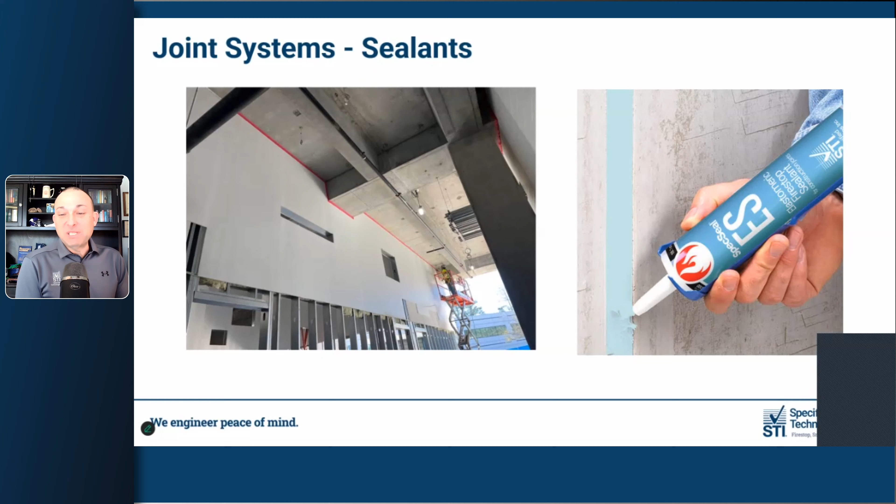Sometimes architects will ask not to have spray in the building or near the curtain wall glass. Joint sealant systems are perfectly acceptable in these situations as well. But if you want to fire stop the joint system without any sealant or spray, you can use a gasket.

This is fire stopping as the wall is being built. Someone's got to get up on a lift or a ladder anyway to shoot that track. This is a gasket that is rolled out on the track and shot to the ceiling or the wall. Joint systems are just a lot easier, and it makes movement a lot better too.

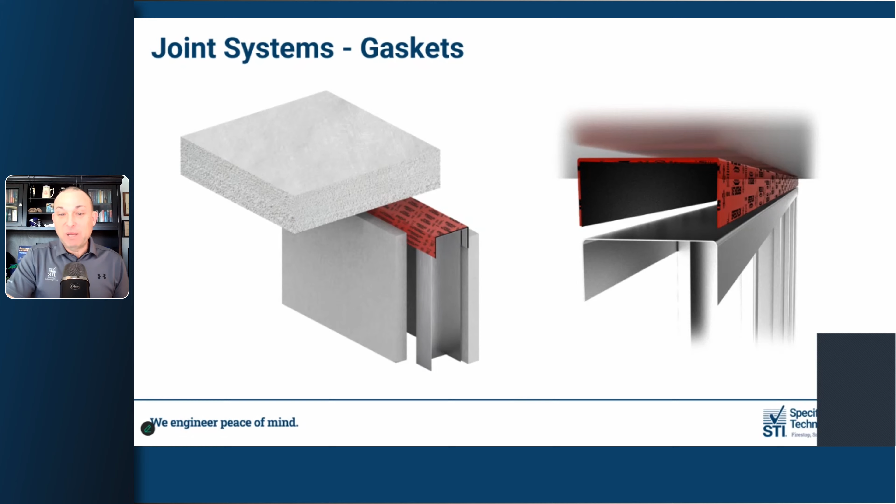You don't have sealant or any type of mineral wool that will restrict the movement, so you'll get 100% compression and extension using these types of gaskets. And zero waste also for the contractor. So if cost is an issue, this might be something to look into. Not that cost is ever an issue, right?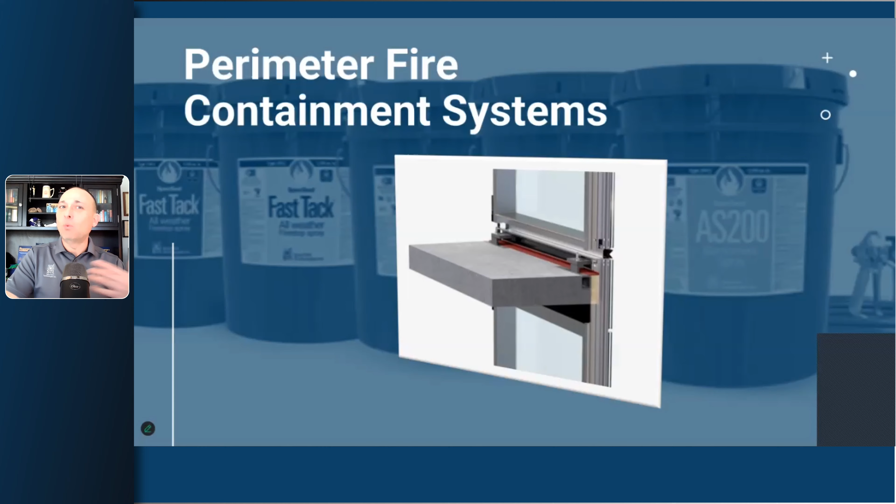All right, finally, perimeter fire containment systems. There aren't a lot of different product types here. There's a water-based, latex-based product, and there's also something that's a silicone or cold polymer hybrid type of sealant that stops water from going through. We'll show you a couple of those here.

A building's facade is often very distinctive, and we get it. You want to make these buildings as beautiful as possible, floor to ceiling glass, vision glass. You don't even want to see the floor line, but there's always going to be a floor line, right? This is where we put those fire stopping systems in.

There's testing that just keeps going, right? It doesn't stop. Not one curtain wall is the same as another. So we want to make sure we're putting some fire protective systems in place early on.

We tell architects, hey, listen, this is something where you should get your manufacturer involved very early, because these curtain wall panels oftentimes are designed and manufactured years ahead of time, sometimes before a GC is even selected, before they even break any ground.

So let's talk about how we're going to make sure these systems are protected once these panels get on site, because once they get on site, I can tell you from experience it can be very cumbersome and very expensive to get a tested system in place, which some jurisdictions require.

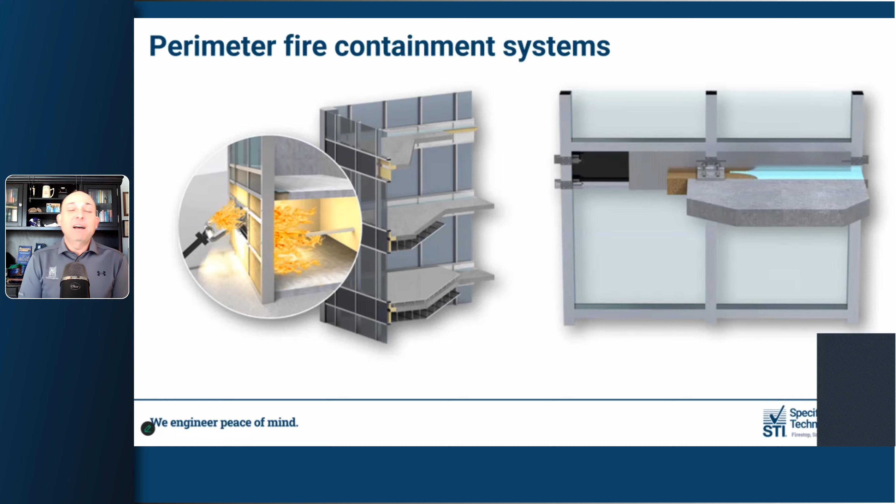Sometimes engineering judgments, which we do all day, every day, especially for perimeter systems, are not accepted. It could mean change orders in the hundreds of thousands, if not millions of dollars. So get your manufacturer of choice involved early on perimeter fire containment systems especially. And again, that's my PSA on that one.

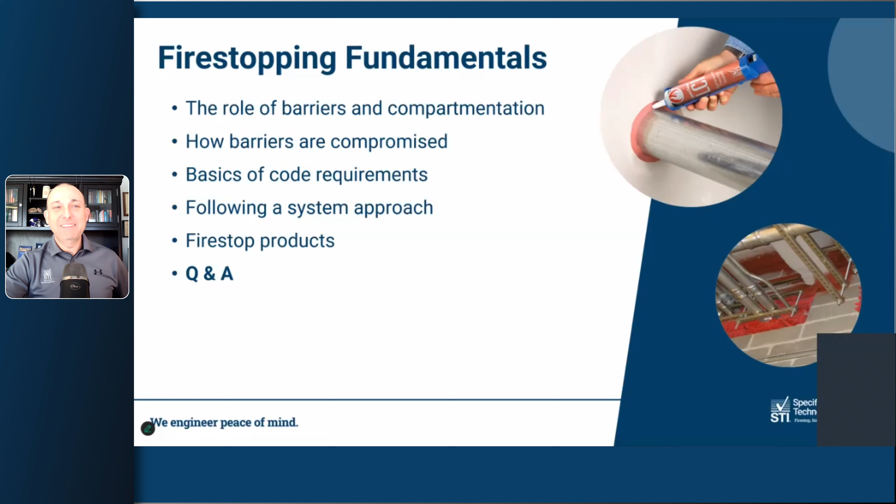All right, so I talked fast because I'm from New Jersey. So we could do this a couple different ways. We could ask questions of me right now, or I could ask questions of the listening audience, a small little quiz, a fun little game. You let me know. We have 15 currently open questions right now in the Q&A. How do you want to go about that? Let's knock those out first, and we'll leave 5 minutes to do the game because people like the game. I promise you. If you're okay with me doing the game, then I want to do the game. We have a record here of like 700 people, so they deserve a game. They deserve a game for sure.

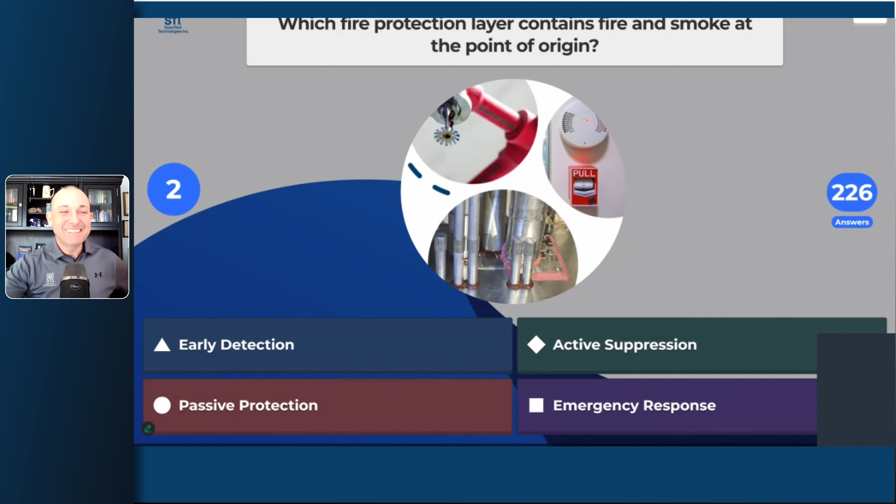All right, 94, you got that one correct. Passive protection is the correct answer, otherwise called fire stopping. Arnold Palmer in first place. No, probably not, but if your name's Arnold, that's even cooler.

All right, question number 2. What is the minimum fire resistance rating required for a smoke partition? What is the minimum fire resistance for your smoke partition? 30 minutes? 1 hour? 2 hours? Or is it not required?

Somebody's kicking themselves in the answer a little too quick.

All right, yes, 81 are correct. It is not required. Smoke partition ends with an N, not required. Smoke barrier ends in an R, it is required. So 145 of you kind of had it right for the smoke barrier, but in this case, not this question.

All right, CB jumping to the top of the leaderboard. I like it, L. Segelman. I'm not even going to try to pronounce those.

Okay, question number 3. The standards ASTM E814 and UL 1479 correspond to which type of fire stop tests? Are we talking about construction joints, through penetrations, curtain walls, or exterior wall assemblies? This is the slide missing from the PDF, so I'm sure someone's not.

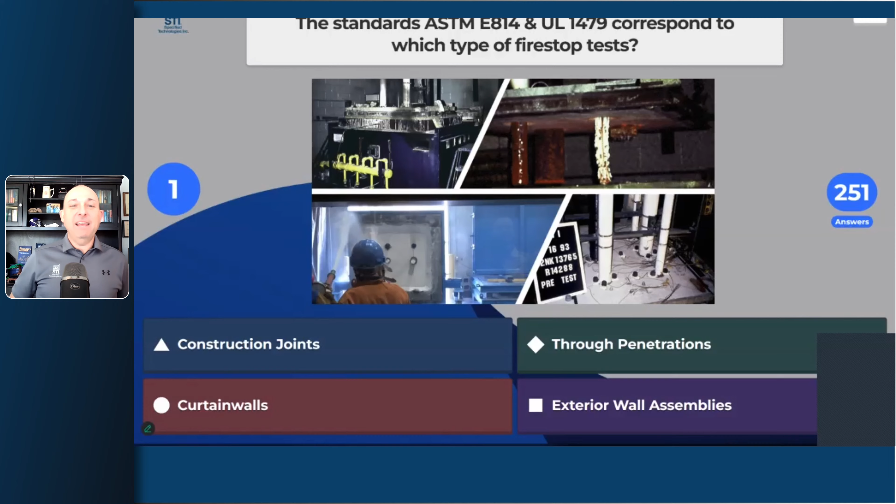I think it's in there. ASTM E814, yes, all right. 168 people got that one right. Wow, yes, that's right. That is, CB got it right too. All right, and N Haven's coming up quick there.

All right, question number 4. This is going to be a slider, it's going to be a number. Make sure to lock it in.

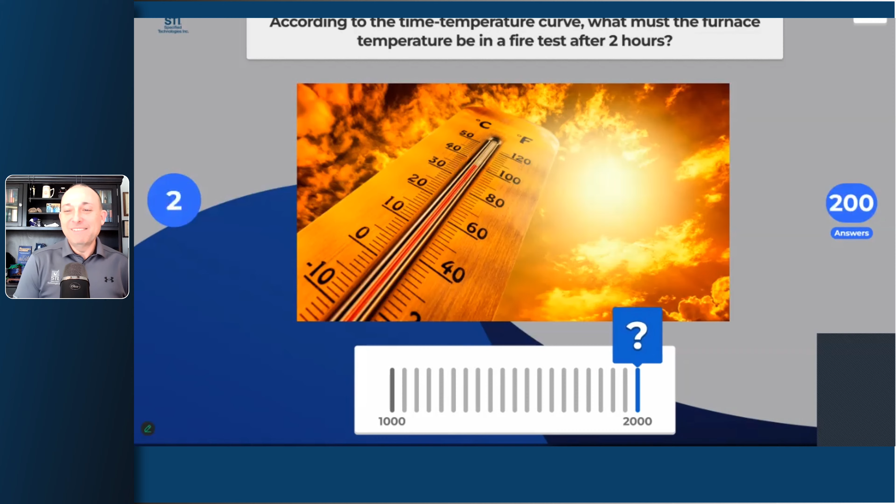According to the time temperature curve, what is our furnace temperature after 2 hours? So it's going to be somewhere between 1,000 and 2,000 degrees Fahrenheit. If you can spell Fahrenheit, you get extra credit. But make sure to hit submit once you get that answer locked in there. And we're not really giving extra credit for Fahrenheit. If you know how to spell it, you're okay.

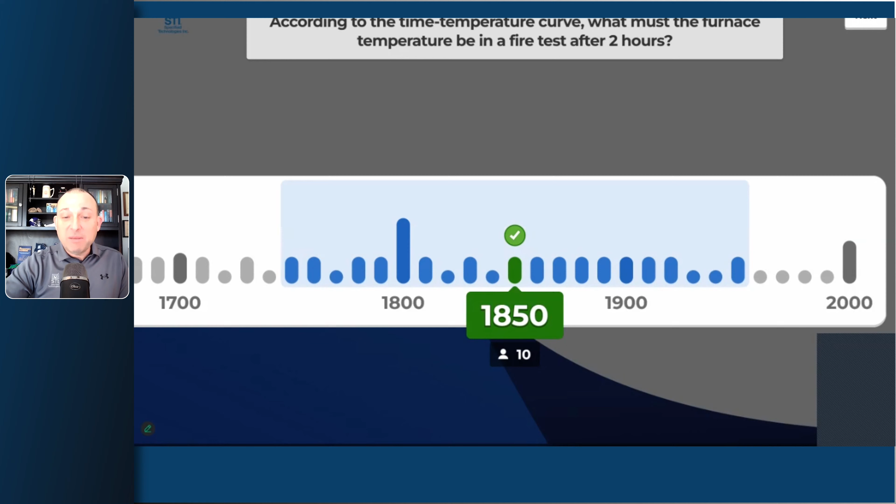Let's see, 1,500 degrees? No, all right, I think it's a little hotter than that. 1,800 degrees? Oh, 1,850, whoa. Let's see how many people got that one right. On the number, 10 people got it on the number. If you guessed within this box here, you got some points, but 10 people got it on the number. Let's see who they were.

L. Segelman in first place. Last question coming up, question number 5.

Why do high traffic openings require special Firestop solutions? Is it because they're exposed to extreme temperatures? Are they larger than typical penetrations? Are they used for structural reinforcement? Or do they change frequently due to evolving data cabling? High traffic openings.

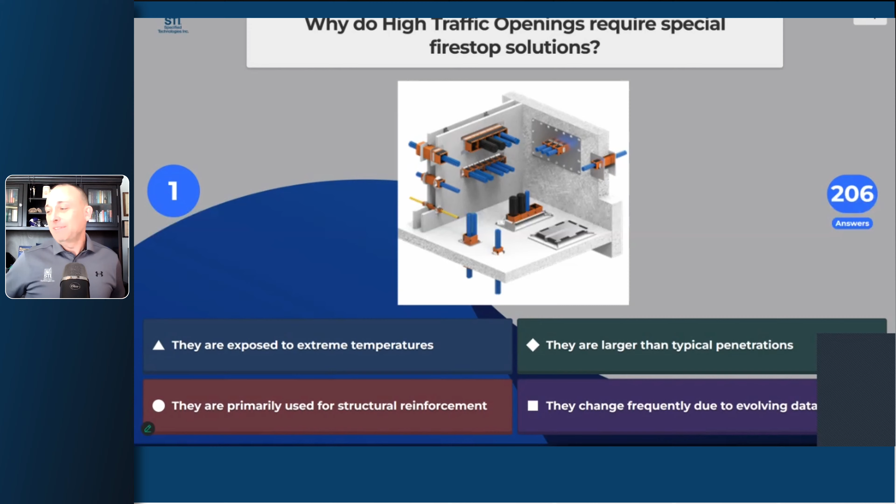Not the toughest question in the world—just got to read all the way to the end there. Yes, best answer is that they change frequently. So, high traffic openings. Let's see who got it right.

Okay, here's our podium. In third place, Kay Whitmore. In second place, Kay No. And in first place, L. Segelman. You know what, I'm feeling very generous, so if you are these three people, send Fulgen your email address right now. I'm going to send all three a gift card. How about that?

Congratulations to the winners. Congratulations there. All right, that was fun. All right, we have a couple more minutes. How do we end this, Fulgen?

I have to do the session code stuff at 1:05, so we have about 3 minutes. Okay, perfect. Yes sir. All right, let me just, can I tell you about STI a little bit? Go ahead, all right, cool.

So STI is a global company, worldwide manufacturer of fire stopping products. It's our only game—we don't make cool tools, we don't make any kind of Post-it notes or anything like that. We just make fire stopping. We're globally based in beautiful Somerville, New Jersey, which is about an hour west of New York City.

We do trainings at our global headquarters 4 times a year. We also do 2-day trainings throughout the country as well. Up in Canada, they're doing some trainings over there as well, so if you need some training up there, we can help you out. And then globally, you can see some of our offices around the world where we have representatives that can come out and see you and help you with any type of fire stopping questions. It's always good to get us involved early.

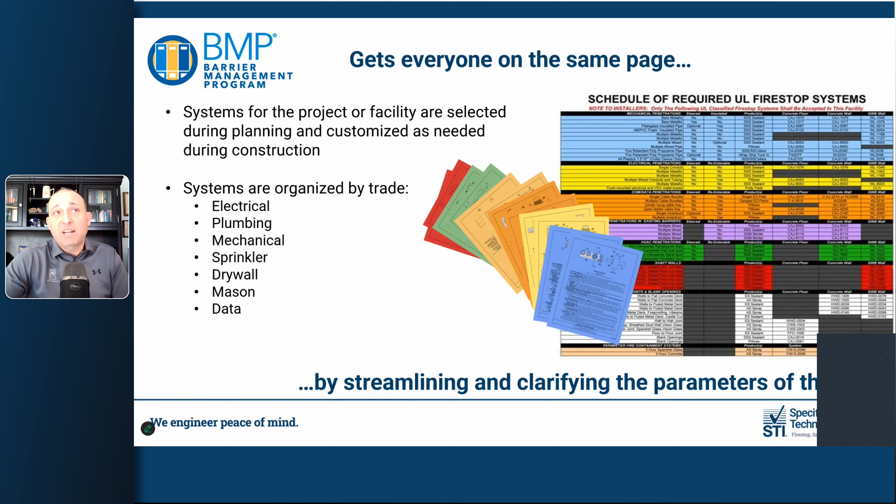We've been around since 1990, so we have 35 years of doing this. And as I mentioned earlier, Access STI is where you can go for all of the digital tools that we have available. We have guide specifications, which are downloadable Word documents. If you're having some issues with that, we can even do a spec review service for you. We have some field engineers that can take a look at your plans and make recommendations on what types of systems you can use—basically a barrier management program. So if you have the different trades, electrical, plumbing, mechanical, we can get them all on the same page.

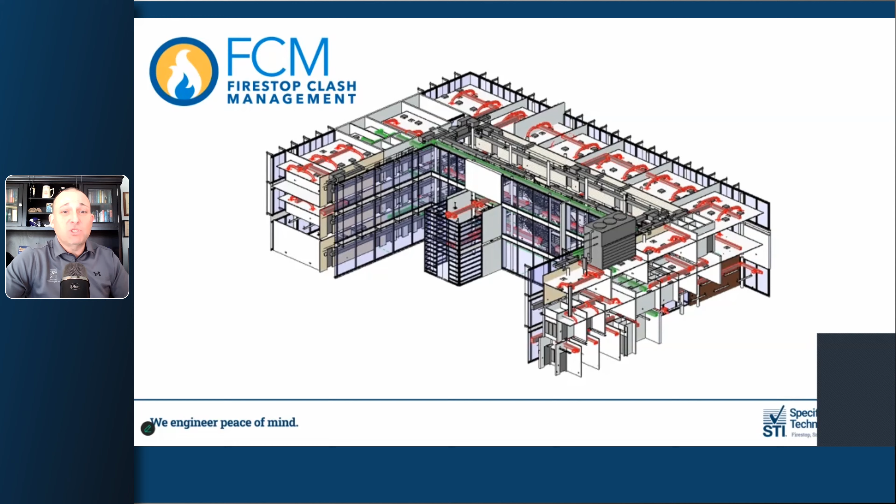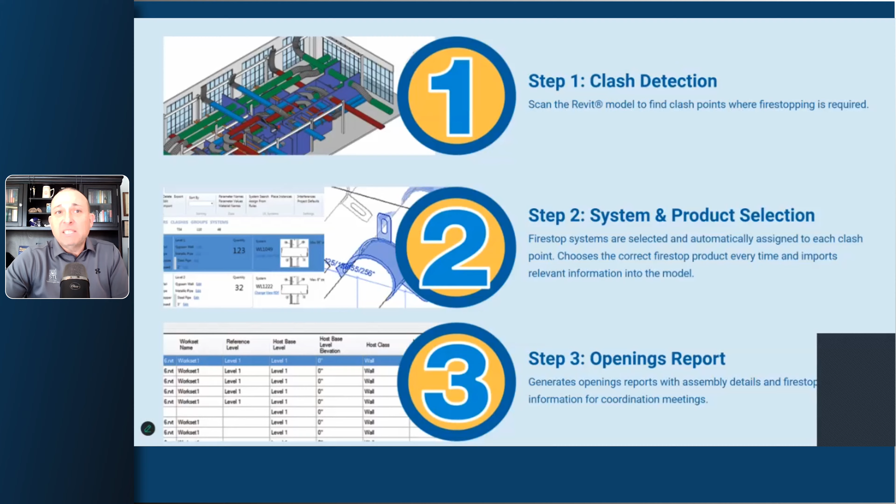We have some tools—on Access STI we have something called Firestop Clash Management. So if you're using Revit in BIM, you can tell your contractors downstream, hey, you're going to be using this system based on our model. We found a detection here and generate an openings report. We just have a lot of tools that are really easy for you to use. And if you ever have any questions, you can get in touch with our engineering support. We have a chat function on our website and our app—feel free to get in touch with them there, or email them, or old school, pick up the phone. It's toll free, an 800 number. So if you want to talk to a human, they'll pick you up and get you moving along.

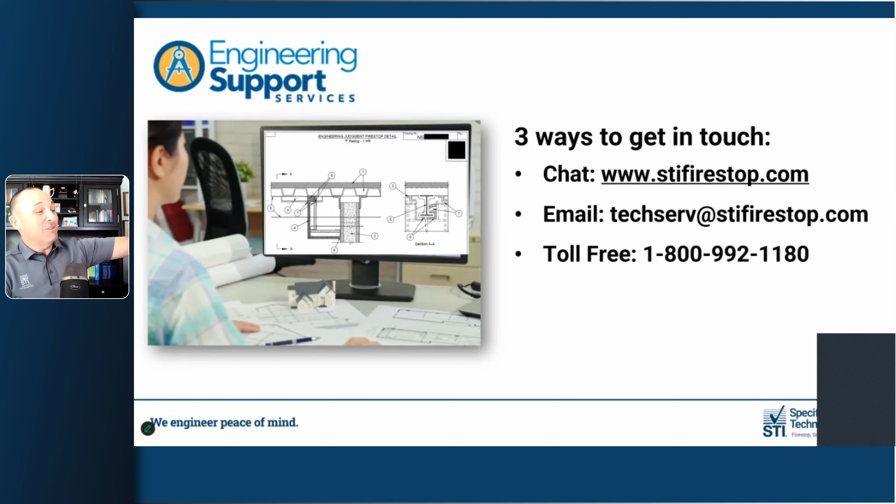That's 1:04. How much? Well, with 7 seconds, you put the 1:05 up there. There we go. Oh man, John, thank you so much. This is great, and we can't ask for a better start to 2026. Oh, stop, I appreciate you saying that. Oh man, thank you my friend.